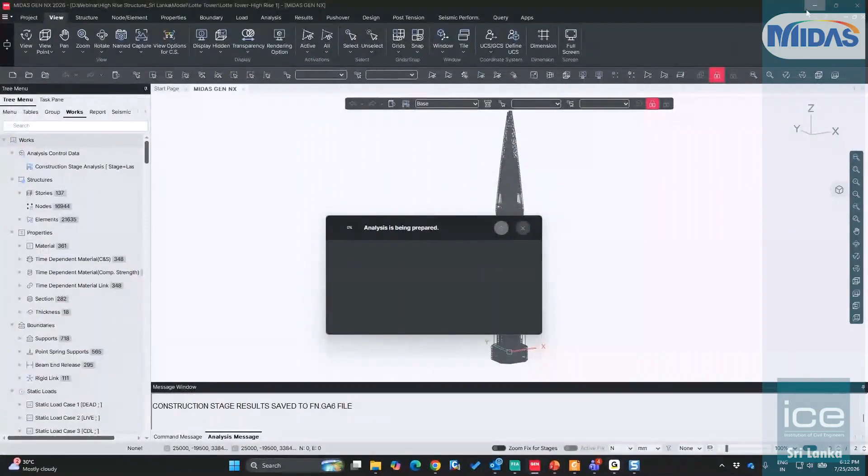Hello, I hope you can hear me, right? Yes, sir, we can. Thank you, thank you for confirming. So, without any further delay, I will first share my screen and then we will start the session. Just give me a minute. I hope you can see my screen, right? Yes, sir, we can see you.

Thank you for the confirmation, and thank you for the introduction. So let's start the session now. The topic is modeling and design of high-rise building structures. I would like to say to the attendees, thank you for joining today's session on this particular topic.

During this session, we will build up a complete picture of how tall buildings are engineered, the loads that govern them, and how a high rise differs structurally from a mid rise, including the main loading systems, the families of lateral load resisting systems, and the specific effects of wind and seismic action. It's not a simple mid rise or regular structure, it's a high rise one, so the governing loads are different.

We also need to consider the construction sequence, as the structure is built from the bottom floor to the top floor, how the behavior, the boundary conditions, and the time-dependent material properties change. These are the things that make the high rise structure different from the low rise or mid rise structure, and also the most crucial part, the differential shortening of the columns.

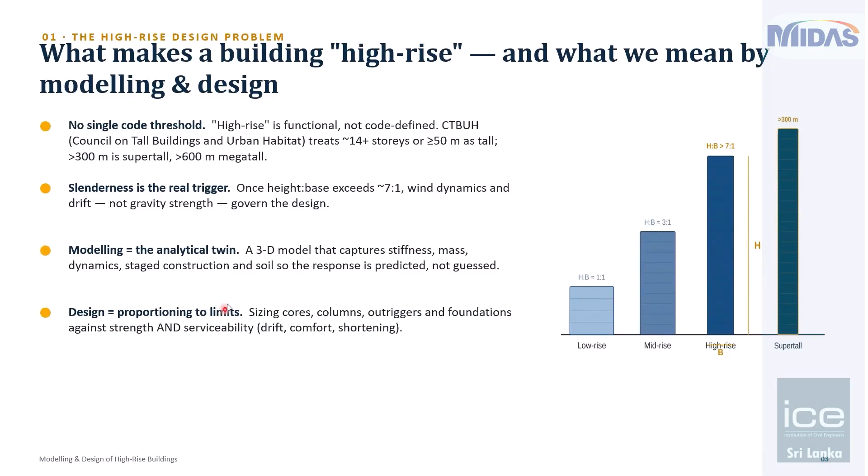So that is the introduction of what makes a building high rise and what we mean by modeling and design. Now, the major loads that govern a tall building.

The gravity load governs majorly in mid-rise or low-rise structures, which includes self-weight, cladding, imposed loads, and is always present and always calculated. But on a slender tower, it is rarely the load that decides the member size. It does matter for one high-rise specific detail: loads accumulated down through the core and mega columns, and then we apply some story reduction factors when we consider live loads over many floors, because it is statistically unlikely that every floor is fully loaded simultaneously. So we have the gravity loads, permanent loads, and imposed loads considered here.

The major one is the wind loading that actually governs. Wind has two components here: along wind and across wind vortex shedding. We will talk about these things in later slides in detail.

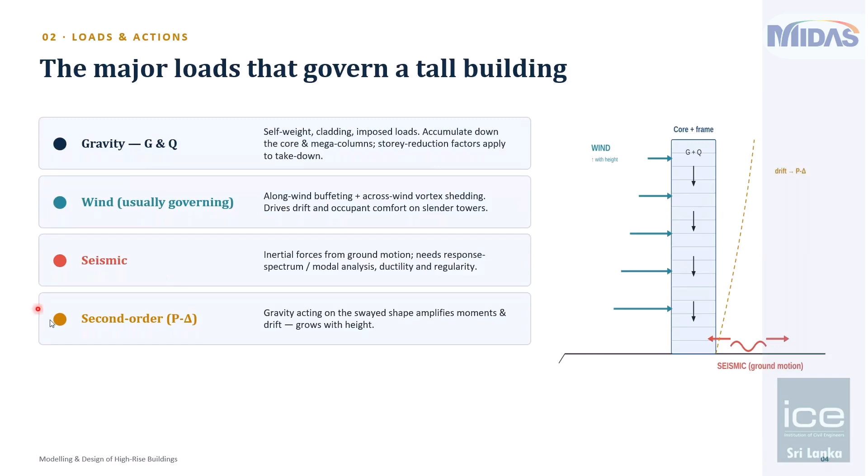The third one is the seismic load, based on the zone where we are constructing our structure, and this also governs the design. Then there's the second order P-delta effect. When we have a very tall structure, there is going to be a lateral deformation, and because of the vertical loading acting through that lateral deformation, there is a secondary effect, a secondary moment or secondary force. That is the second order P-delta effect we have to consider in tall buildings. And finally, the time dependent material effects, which include creep, shrinkage, differential shortening, and construction stages, which we will be talking about in detail in later slides.

Let me talk about what the analytical model must capture, the things we should include when doing the modeling. First and foremost, the full 3D model that includes, if we are going for shear walls and frames and cores - the shear wall in the center of the plan is termed as a core - the modeling of that, outriggers, columns, slabs, all working together in one model and not as a set of isolated 2D frames analyzed separately. So that's a full 3D model we have to generate, with the interaction, so that we can check the interaction between all of these different elements.

Now the rigid diaphragms. As we know, floors distribute lateral load between vertical elements, so we can model that as rigid diaphragms, or based on the openings in the slab, we can model that as flexible or semi-rigid diaphragms. It helps us in distributing the load to the connected columns and connected shear walls or cores. In the previous sessions we already talked about how loads are transferred from the center of mass location to the adjacent column based on the stiffness of the column and so on. So the rigid diaphragm part has to be considered.

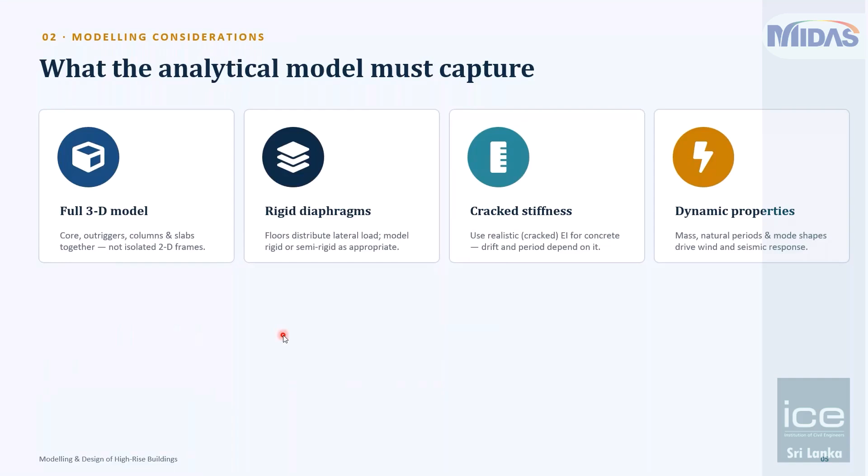The fourth comes as the dynamic properties, that includes mass, natural periods, mode shape. Mode shapes drive both wind and seismic response. If we get the mass wrong, say the seismic mass calculation is wrong, by forgetting superimposed dead load or something like facade weight, every dynamic result downstream is going to be wrong too. So we have to consider these parameters very well.

Now the fifth one is the staged construction. We have to model floor by floor buildup so that the shortening and the lock-in forces are realistic. When we are going from the first floor to the second floor and to the third floor, there are already locked in forces in the first floor because of the second and then because of the third. So we have to consider those locked in forces and the deformations happening to the lower floors because of the upper floors. That can only be considered using staged construction, and it is very much critical in the case of high rise buildings.

The soil structure interaction part - we have already talked about this, which is the interaction between the soil properties that we will be providing as a spring support, and we will be assigning it to the pile location, to the raft location, and then we can check the interaction between the structure and the soil beneath that.

So second order P-delta that we have already talked about, why we need this. That is one effect, and also there is geometric non-linearity. There are actually two P-delta effects: one is the capital P-delta, and the other is the small p-delta. Capital one is the global effect, small one is the localized effect. We should consider both, that is the geometric non-linearity, and then we can check the non-linear behavior of the structure, how it is changing based on the applied loading.

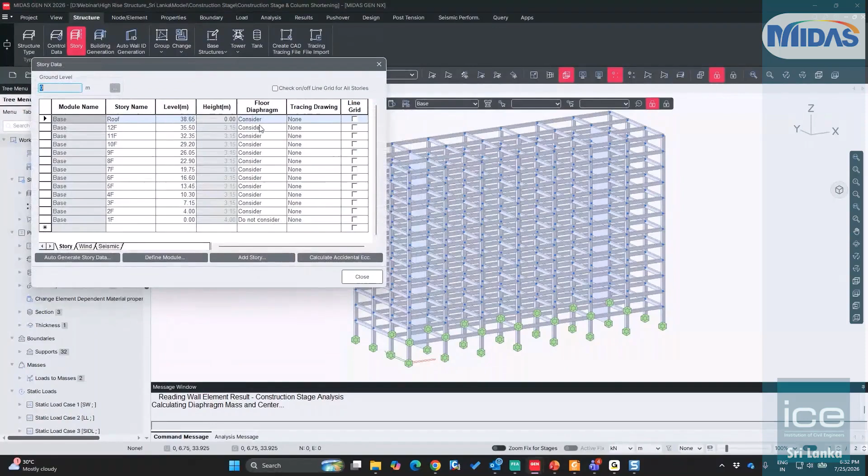So when I go to the display option here, go to boundary and then story diaphragm, and let me undisplay the support. Here it's the center of mass location that is located by the software, and that is connected to each and every node in that particular level to consider the rigid diaphragm behavior.

Here you can see these blue dots at each and every floor level - they are the center of mass location for each story, and they are connected to each and every node at that particular story to consider the rigid diaphragm behavior. Where we don't want to consider it, we can just go to story and click on 'do not consider', and it will not consider the rigid diaphragm behavior in that particular story.

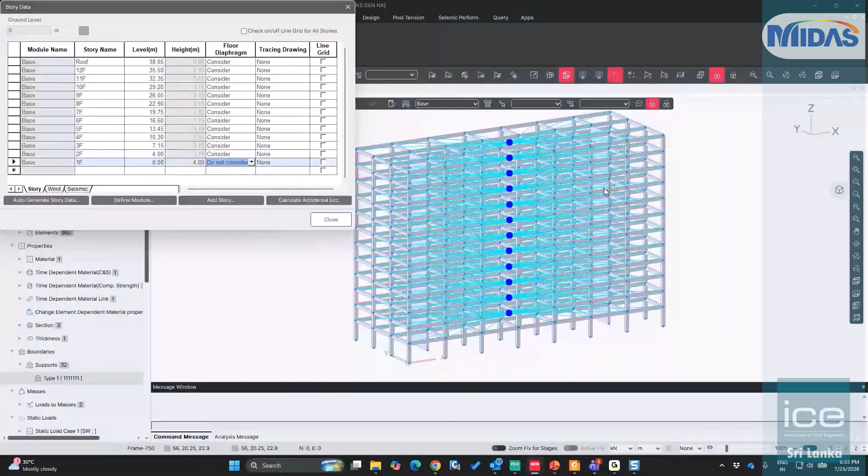And then we can go on modeling the real-time slab there. If we are not considering the rigid diaphragm, we can just go to node element, create element, and from here go to plates, select the material, select the thickness of the plate, and define the boundary nodes like this.

We can click here, define the boundary nodes, and it will generate a slab having a plate element of thick type, which will consider the in-plane and out-of-plane behavior both. If we want to consider only the in-plane, we can go for the thin type, and with drilling degree of freedom, this is to consider the torsional effect on the plate. So there are different options available here.

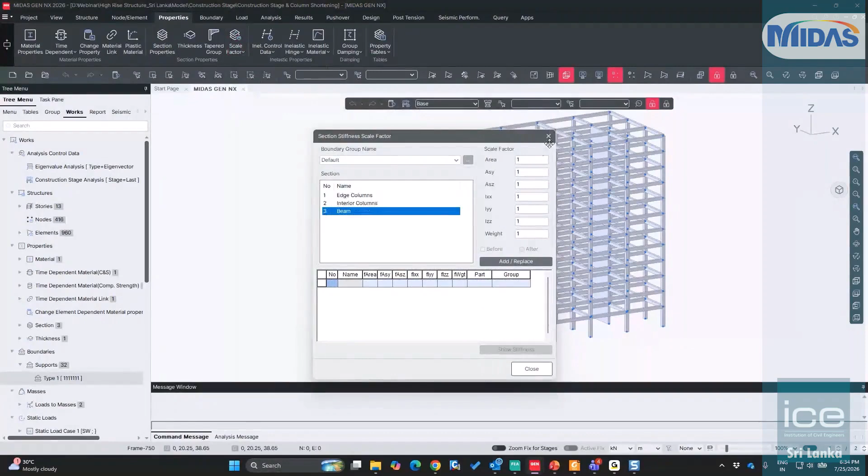Now the cracked stiffness part. That can be considered using the properties tab here, and we can go to scale factor, section stiffness scale factor, and here these are the different section properties that we have defined. Let me show you that. These are sections - this is my edge column, this is my interior column, and this is my beam.

These are my beams. So I can go to the scale factor, and for the beam, if I want to consider 35% of the gross stiffness, I can go to IYY 0.35 and IZZ 0.35 and click on add, and then it will add that particular scale factor to consider the cracked stiffness. Similar to that, we can do the same for the columns.

Now the dynamic properties. When we are running this particular example, it's actually G plus 12. We can go to G plus 20, 30, 40, whatever we want. And when we want to consider the mass, we will go to the structure type and convert self weight into masses. We will check on, and this conversion will be in the X, Y, and Z direction, so the self weight will be converted into X, Y, Z direction.

Now the next option is when we are applying the vertical loads, those vertical loads should also be converted to masses. That can be done in this particular option, loads to masses, and here we can select the load cases. Like here we have self weight, already done in structure type, live load and SIDL - these are two vertical loads. So we can apply the scale factor - 0.5 for live load, and for SIDL it is 1. We use this option to convert loads into masses, which will be used to create the mass matrix, and then to run the eigenvalue analysis to get different mode shapes.

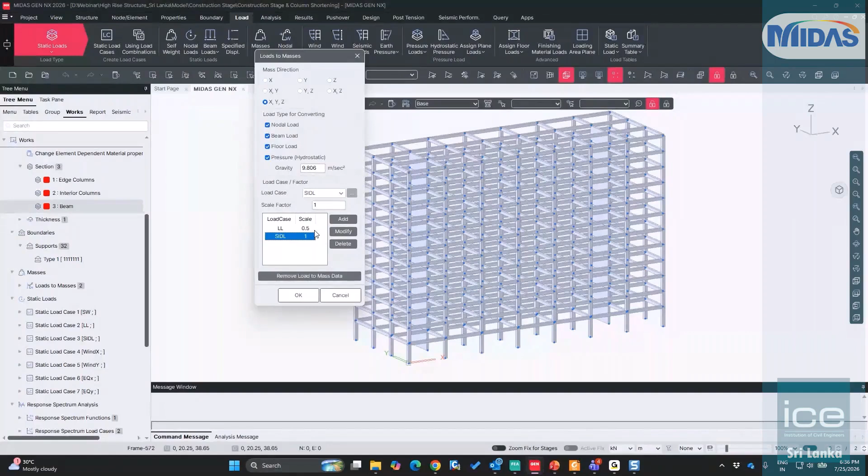And the staged construction, we will be talking about this thing in detail in further slides, so I'm not going into this part right now.

Soil structure interaction - for that I have already shown you, we can go to boundaries and define support, point spring, surface spring option. If we have mat foundation, we can go to surface spring option, and the mat like plate, we will model as a plate element. Then we can go to either distributed spring, or provide the modulus of subgrade reaction as compression only, linear, or tension only.

So it is mostly the compression only type of support which considers the non-linear behavior of the soil, where only when we have compressive force on the soil will we have reaction. Otherwise, if there is any upliftment, it will not show any reaction. We will enter the modulus of subgrade reaction, and it will provide a distributed spring support. So these things can be used to consider the soil structure interaction between the structure and the foundation.

And if we have a pile foundation, in this particular software we have pile spring support. For three kinds of soils - sand, soft clay, and stiff clay - the software practically generates the py curve that we usually get from the geotechnical team. Using the pile spring support, the software generates the py curve, which can directly be used as a vertical spring and a horizontal spring to simulate the behavior of the soil - vertical as a linear one and horizontal as a multilinear, which considers the py curve of the soil.

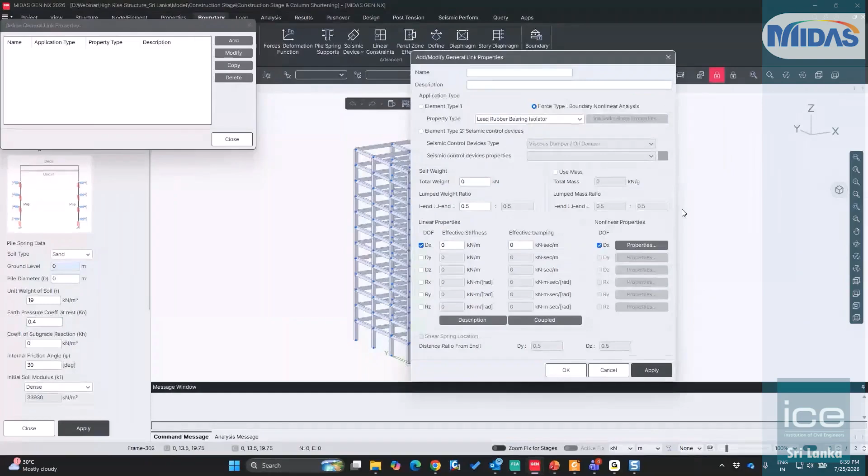The last thing, damping and dampers - I just want to show you how we can provide that. It's also in the general link properties, add, and here we can provide it as a viscoelastic damper, gap, hook, hysteretic, lead rubber bearing isolators, and also non-linear properties to those dampers. Using these options, we can provide that as a spring in our model to consider the damping behavior.

Let's proceed further.

The next thing is how high rise behaves differently from mid rise, so we have tabulated this particular thing here. The governing load in the mid rise is gravity, which is a strength issue, and that typically governs the member sizing. In high rise, wind and drift is actually a stiffness problem, and that typically governs the high rise structure.

Related to behavior, mid rise structures can usually be treated as essentially static, whereas high rise structures are genuinely dynamic - we are dealing with periods, modes, shapes, floor acceleration, and so on. A simple rigid frame is often adequate for mid-rise, whereas high-rise needs cores with outriggers, tubes, or diagrids. We will talk about these different terms in later slides.

And the P-delta effect we have already discussed - it is usually negligible for mid-rise, but very much relevant in case of high-rise, and we have to check it at each and every single design iteration.

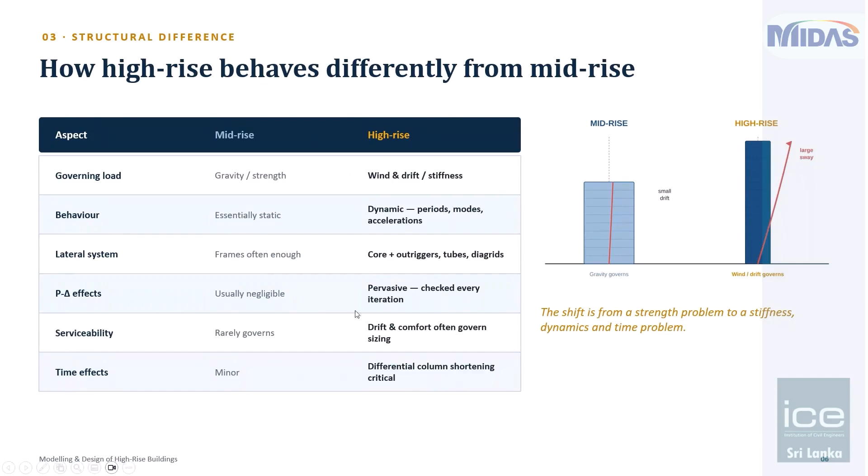What are the different lateral load systems, and what are the differences between them? The first is the rigid frame, practical for up to 30 stories. It's beams and columns moment-connected rigidly, forming a self-contained frame that resists lateral load through bending, not axial wall action. It gives the most open, column-light floor plate of any system, with no shear walls required, but it is relatively flexible, with larger drift under wind or seismic load than wall-based systems, and becomes material inefficient beyond roughly 30 stories.

The second is the shear wall or core type structure. This core can be at the lift location in our building. It carries essentially all the lateral loads, behaving like a vertical cantilever fixed at the foundation. It is very stiff and efficient with simple, predictable behavior, and the core conveniently doubles as the services spine. The effectiveness drops off after this; the system can go up to about 40 stories, not more than that.

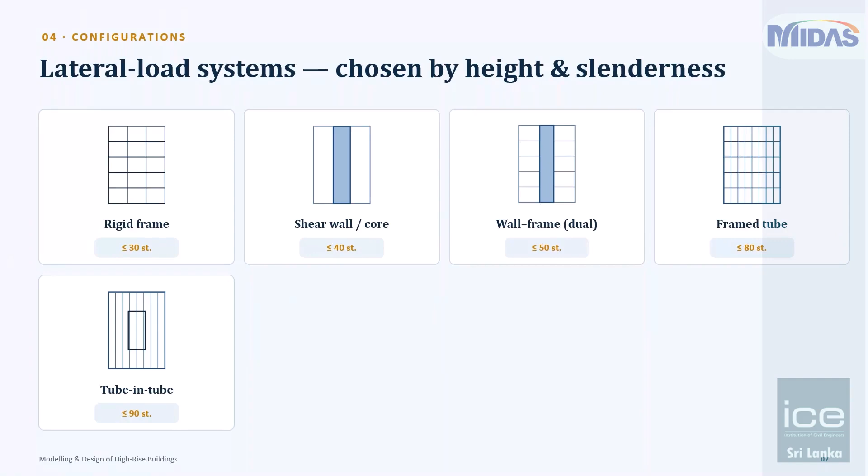The fifth is the tube-in-tube, where there's a tube structure inside of a tube, making it more efficient. The maximum height it can go up to is about 90 stories.

Then comes the outrigger and belt system, where we have a core shear wall in the center and peripheral columns. The columns are extended at the periphery, and we connect the core to the peripheral columns using outriggers, which are deep beams. This increases the effective base size. As we talked about slenderness ratio earlier, a higher aspect ratio makes it more efficient. So when going 100-plus stories, we increase the aspect ratio by providing a shear wall in the center and peripheral columns, connecting them using outriggers.

Another example is the diagrid, where we don't have columns but diagonal members instead. Then there's the bundled tube, which we see in a lot of super tall buildings, where as we go up, the tube system bundles a large number of tubes together to create a super tall building.

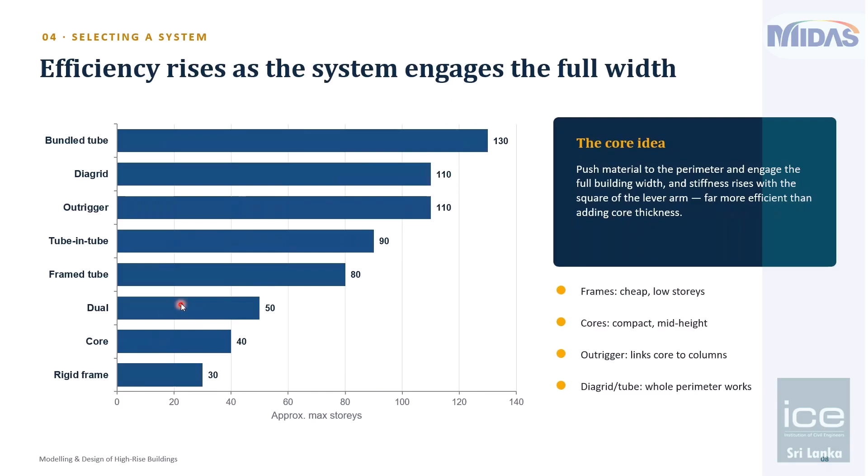So now let's talk about wind loading. What are the different loadings that we have already discussed? Wind load, seismic loads, and other types of loads. Let's start with the wind load, the along-wind and across-wind effects.

Wind is usually the headline load for the slender tower, and it causes a pressure that pushes on the building. The first part is the along-wind response, that is the buffeting caused by turbulence in the wind direction. In Eurocode terms, this is captured through the structural factor CsCd, and we will be looking at how we can calculate that factor, and how the software gives us that particular thing in later slides.

And crosswind, that is actually the vortex shedding, which is a more dangerous phenomenon. As wind flows past a bluff body like a tower, it sheds alternating vortices on each side, which creates a sideways oscillating lift force. When the shedding frequency coincides with one of the building's natural frequencies, resonance occurs. This is precisely why very slender towers often need wind tunnel testing rather than code formula methods alone. So crosswind is more dangerous than the along-wind parameters.

The third one is occupant comfort, which we have been talking about as the serviceability criteria, where we check the peak floor acceleration frequently, and that should not exceed a given criteria. So the peak floor acceleration can be checked as a dynamic loading because of the wind.

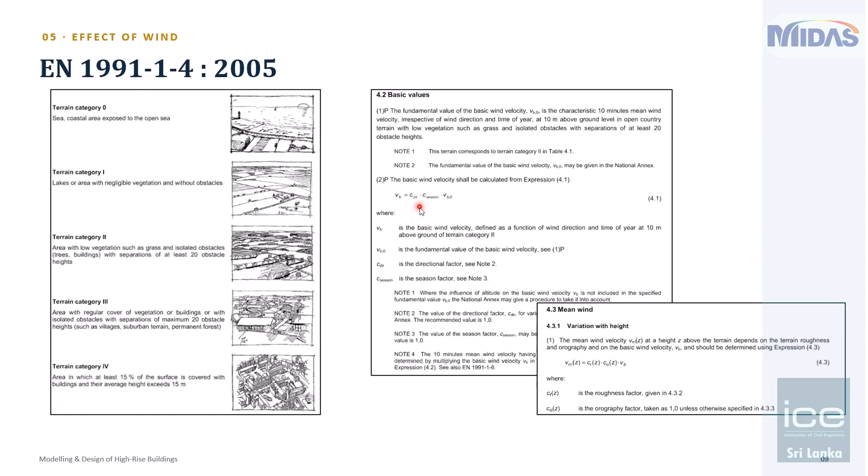There are also factors like orographic effects, adjacent buildings, nearby buildings, what is causing effects on the newly constructed building, and the height of the building, how the wind load changes because of the height of the building, and so on. This needs to be considered based on Eurocode EN 1991-1-4 2005.

And now the wind force calculation, that is the CsCd factor we talked about in the initial slide of this wind loading topic. There are three different force factors: external, internal, and friction forces. The combination of all these forces gives us the final wind force on our structure. So let's see this in the software.

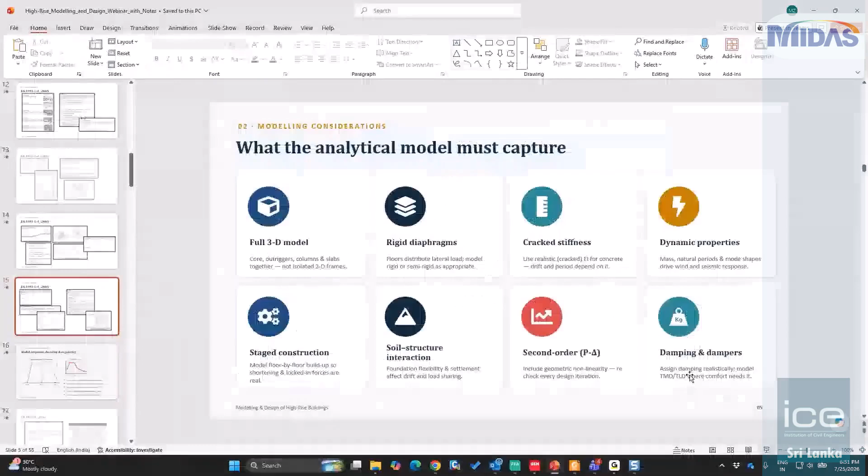In this particular example, when we go to loads and the wind loads, here the structure type and the friction coefficient, like the force effects that we talked about in the last slide, we can use these coefficients. The orography factor C naught, C direction, that we saw in calculating the basic wind speed, we have to enter that here.

Seasonal factor and the turbulence factor, building height, all these things we have to enter those parameters here. Now the orographic effects - to consider them, we can go to this particular option, cliffs or hills, whatever it is, and the building location, whether it is upwind or downwind with respect to that orography.

These are the different parameters like the height of topographic feature, length of upwind and downwind, that we can enter. Now the effects of neighboring high-rise structure - we can consider raising of displacement height. We can consider all these particular different criteria given by the Eurocode, and then apply the final wind loading in our structure, also considering the external and internal pressure coefficient.

The code specifies the formula for external and internal pressure coefficients. Internal pressure coefficient is some factor of the external one, so we can use these particular options - either we can go to automatic, or we can go to user defined to define those particular coefficients here.

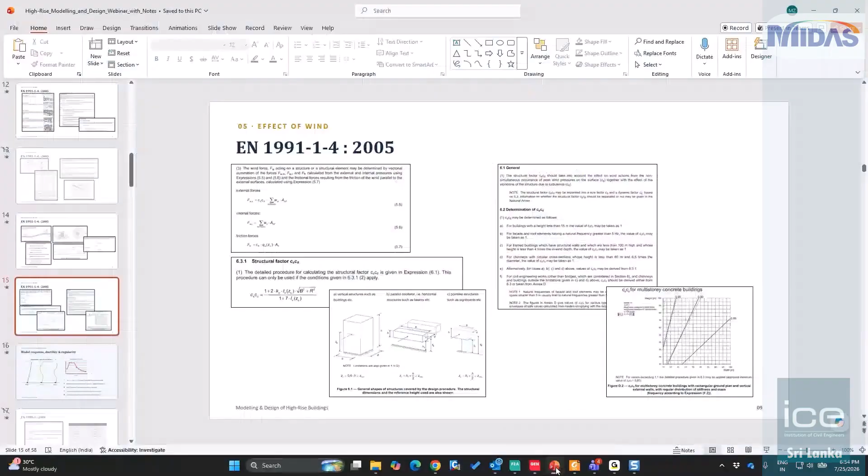For example, if I enter that as my point 1, finally it will calculate that structural factor as 1.89, and I can just click OK, and it will be considered here. So this is how we can consider the CSCD factors to calculate the final force because of the wind loading in the software. These are the formulas given here in the Eurocode to calculate those factors.

Let's come to the next loading thing, that is the response spectrum, or the seismic load, which considers the different mode shapes, time period, and that actually depends on the flexibility of the structure. So seismically, tall buildings behave quite differently from short ones, and this slide sets out why.

Tall means a long fundamental period, which is T1. That means the simplified lateral force method in seismic codes are calibrated for short period, more regular structures, and they usually become invalid or at least unreliable once our period gets long and our mode shapes get complex, which is essentially always true for a genuine high rise.

For example, if we have this particular response spectrum curve and we have a very high period of a building, like when we have a high rise structure, the period increases, and that comes somewhere here. So that means our base shear, the force for which we are going to design the earthquake force, lies somewhat here. That is not the actual force that is going to be there in a high rise structure, but because of the high period, that tells us something like this.

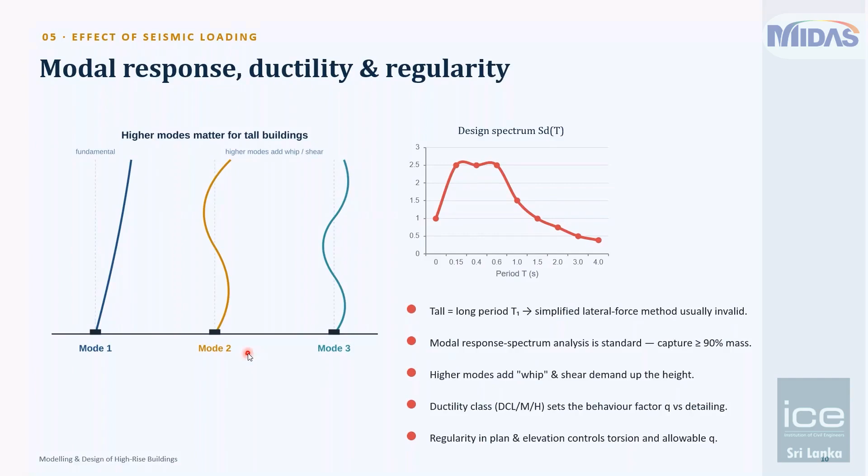Regarding the response spectrum curves, Eurocode gives us two types of response spectrum, type 1 and type 2. In simple terms, type 1 is for higher magnitude earthquakes, and type 2 is for lower magnitude earthquakes. In the software, we can directly go to Eurocode 8, select horizontal or vertical design spectrum, and there we can select type 1 or type 2 accordingly.

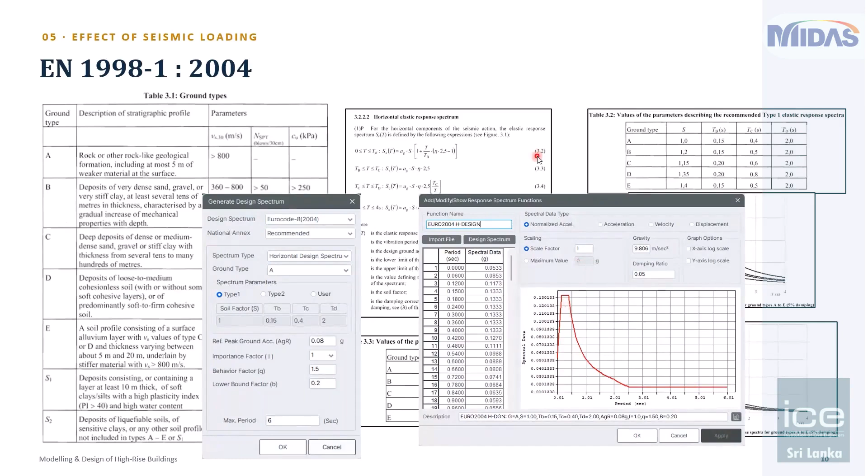We can also set the behavior factor q, based on which the spectral data will be calculated and the response spectrum curve will be generated as given in Eurocode, and then we can use that loading to perform the response spectrum analysis.

So those are the two major loads, wind load and the response spectrum loading, that we have talked about. The third one is the time dependent loading, which is actually very critical in the case of high rise structures.

So what are the different time dependent material properties? First is the concrete strength, the characteristic strength of concrete, which actually increases as time goes on. Then there's creep, which is a sustained stress that is slow and ongoing, and it keeps increasing. It has two effects, one linear and one non-linear, where when we remove the load, some part of the creep is restored and some part is not restored.

And then the third one is shrinkage, which happens because of the loss of moisture in the concrete.

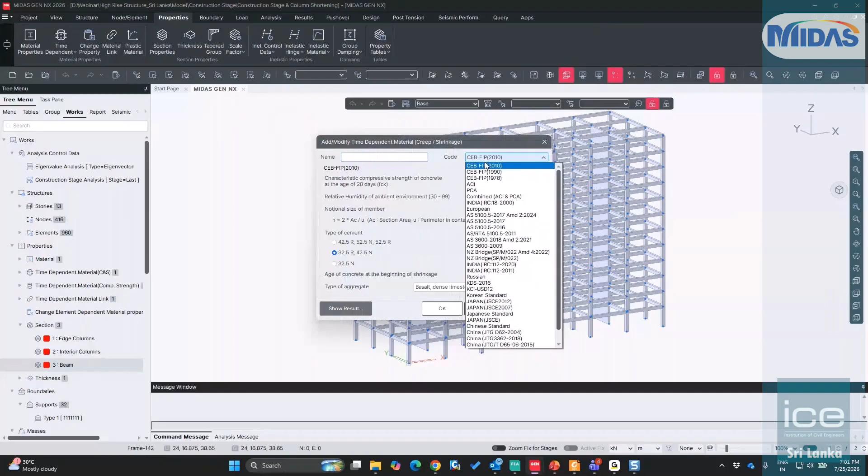There are different parameters. We go to the European code, and we have to specify the characteristic compressive cylindrical strength of concrete at the age of 28 days. Suppose I go for 50,000 kilonewton per meter square, relative humidity 70%, and the notional size of the member, which is the H value, that is 2 times the section area upon perimeter in contact with atmosphere.

So we will first write a random value to start the calculation. Then the software calculates the notional size of each and every member on its own. It's not possible to calculate everything and write it manually, so the software does it for us.

So we will go for the EN 1992 type of code. Age of concrete at the beginning of shrinkage is 3. Then we click on show result, so we get the creep coefficient, which we have already seen in the slides, and this is the shrinkage strain.

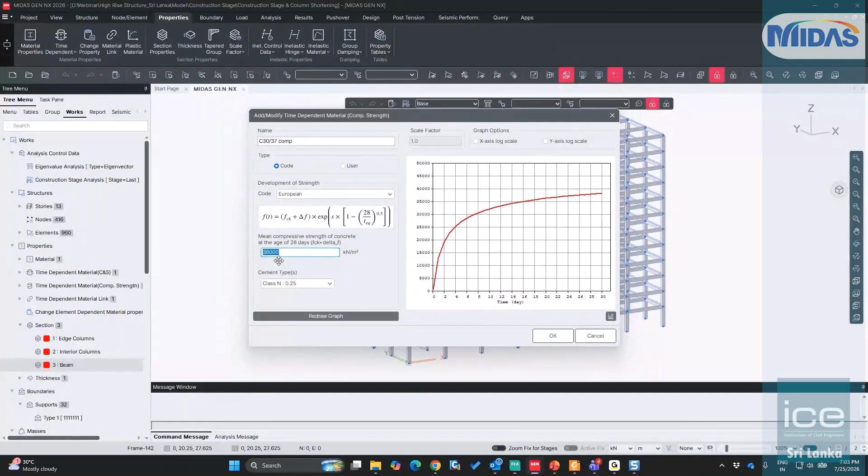So these are the values for creep coefficients. When we want to define the compressive strength, we go to compressive strength, modify. Here we select the code Eurocode, and again the mean compressive strength of concrete at the age of 28 days, and also we have to consider the delta F, which is 8 MPa based on Eurocode. So when we are considering 30 MPa, it will go to 38 MPa while defining the parameters for the compressive strength and the type of cement.

Then we link these material properties with the defined grade. We have already defined this particular grade C30/37, and in that we are linking the creep shrinkage and compressive strength material properties as time dependent material properties. Also the notional size can be defined by going to change properties, and the parameters given based on Eurocode and CEB-FIP are the same, so we can use CEB-FIP directly. If I click on this three dot button, here you can see the H value for each element is calculated by the software, so we don't need to worry about that part.

The second part is the response spectrum loading. That can be applied by going to load and the dynamic loads. There we have response spectrum as well as time history loading. We are not going to time history load right now, so response spectrum function.

Modify design spectrum, and here we can select the respective code. Then there are four options: horizontal elastic, vertical elastic, horizontal design, and vertical design spectrum. I'm going to horizontal design spectrum. Ground type - these are the different ground types given in Eurocode, and then type 1, type 2 that I told you earlier, these are different types we have to select. Then the peak ground acceleration, importance factor, behavior factor Q, and the lower bound factor B maximum up to which we want to see the results. Based on that, we can define the response spectrum curve.

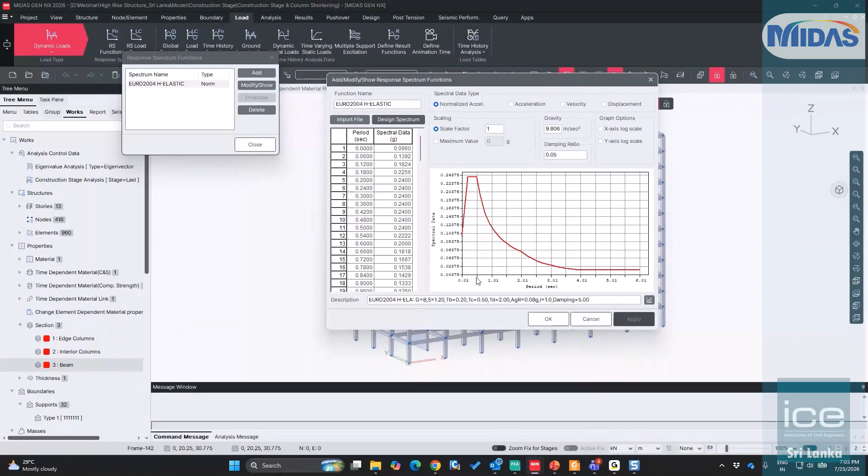Now, when we have defined the response spectrum function, we go to the load cases. Here in this particular load case, we select which plane we are applying the response spectrum loading, which is the XY plane, and excitation angle is 0. When we have a symmetric building like this, we can directly enter that as 0. Then the modal combination control, which is based on CQC or SRSS or absolute or linear combination, whichever way we want to combine the modes, we can assign that.

Now we have one more option here, termed auto search angle. When we don't have a plan like this orthogonal plan, but some unrealistic, non-symmetric kind of plan, then we don't know what is our principal axis or principal angle. So in that case, we can't directly apply the loading at 0 degree. We have this option - auto search principal angle, major. Then we apply the loading by considering the major in X, and in Y we apply the loading by going to the ortho. What the software does is apply the loading along this periphery at each 1 degree interval, and whichever angle gives us the maximum result is stored here as RSX, and RSY automatically takes the 90 degree of that angle, the orthogonal axis. First it finds the principal axis causing the worst effect on the structure, and then applies another loading at 90 degree of that principal axis. So we have these options to apply the response spectrum loading.

Now let's talk about the construction sequence, construction stage. We all know that buildings are not constructed in one single day, and especially if it is a high-rise structure, it is going to take a lot of time, like 2 years or sometimes 3 years. So when we have the time difference between construction of elements, like the bottom floor and the top floor, the creep, shrinkage, and compressive strengths are also going to be different for those parts - the bottom and the top part. So we cannot simply model it as a single model like this.

We cannot simply model all the floors at once, apply the dead load, live load, wind load, earthquake load, run the analysis, and then design each element based on those results. We cannot do that, because in that case we are ignoring the effect of time dependent material properties, which is very crucial when the construction time is high, and also the construction sequence, like when the boundary conditions are changing.

So we have to consider all those parts, especially for a high rise structure. What we need to do is model it step by step: the first floor, then the second floor, and so on up to the last floor, whatever floor numbers we have. Then we apply the final loads, like live load, wind load, earthquake load, and check the results of each construction sequence.

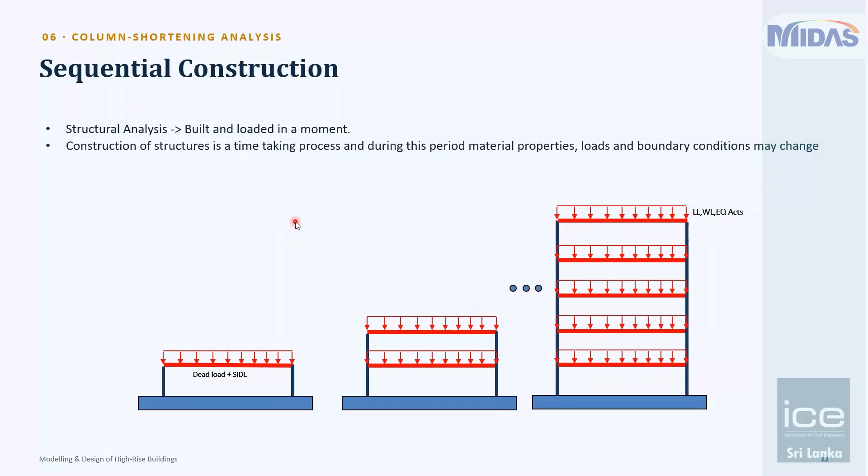When we go for the final model and check the bottom story results using construction stage analysis versus a model not using construction stage, the demands are going to be different. The sagging moment, the hogging moment, and the shear forces will be very different in both sequences, because in one we are considering time dependent material properties, and in the other we are not. Also, the boundary conditions matter - sometimes we provide temporary supports that change the behavior of the beam from cantilever to simply supported or propped cantilever, and eventually to a fixed beam. During construction, the boundary conditions also change, so we have to consider that. That is why we need sequential construction or construction stage analysis.

For example, in our conventional analysis, we model the whole structure at once, apply the loadings, and sum up the results. So we have this particular structure - this is my model where I have modeled everything at once. My first story is loaded, my second story is loaded, and then we do a simple linear superposition of these two scenarios to get the final model. This is what we do in conventional analysis.

In construction stage analysis, we only model one single floor - that is actually the practical scenario happening at the site. Then we model the second floor after that, and then we specify the loads.

In the conventional case, all the sets are active in our model, and we apply the loads one by one to each floor. But if you see this particular beam, it is being shared by these two columns. So the stiffness of the columns and of the whole structure is different from the first stage to the second stage. In conventional analysis, it remains the same for both situations, but in construction stage analysis, it changes. We have only these two columns and one single beam at first, and then we have the whole structure. That is very crucial for the final result, and because of this the final result changes a lot.

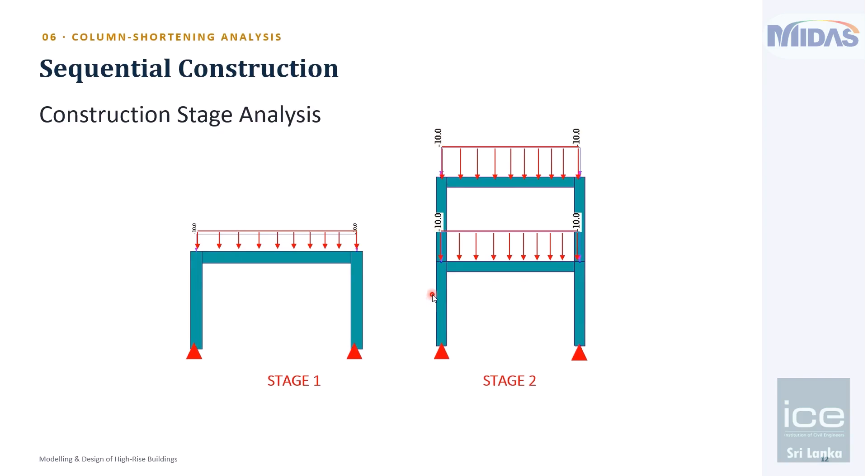For example, when we go for the conventional analysis, the bending moment in the column is 16.6 and the sagging moment in the beam is 29.2. But using construction stage analysis, that changes to 35.3 and 32.3. So with conventional analysis we end up designing for these lower magnitudes. Ideally we should not do that, because after the whole construction sequence we are going to get higher forces than this, so we need to consider those additional forces.

Now let me show you what is available for this in the software. This is when I turn off the 3D view - this is the building having shear walls and frames.

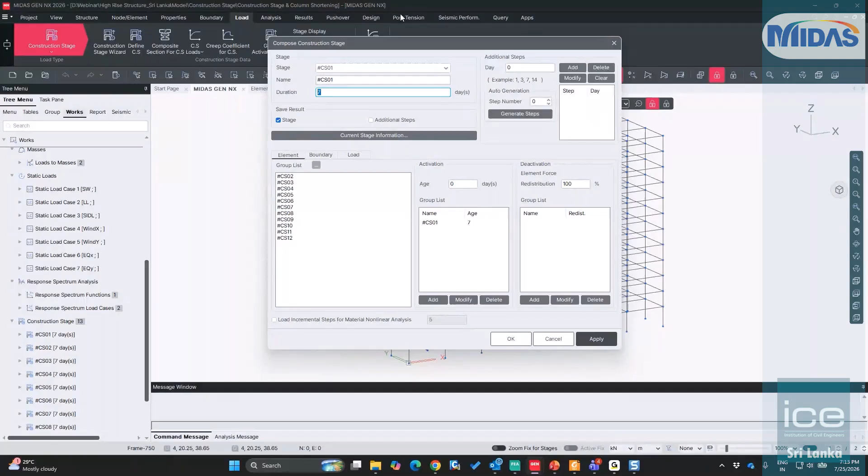When I go to construction stage, define CS, and add and modify, here we have three options: element, boundary, and load. And the duration - duration means what is the time this particular construction stage takes to finish. So suppose I am constructing the first floor right now - how long will it take to finish the first floor construction? That duration we have to enter here.

And then what are the elements that already exist when we are constructing this particular thing? So we already have, suppose, the foundation, then we are going for the first floor. So we will activate the foundation, which will have some maturity.

Suppose we want to consider 7 days of the maturity, or 28 days for that particular already activated element. So we can activate that here. And then the boundary conditions.

When we are constructing the first floor, our foundation is already there, and that is having some spring support or some fixed support or different type of supports can be there. So we can specify those boundary conditions here in this particular construction sequence, and what are the different loads in this construction sequence, CS01. So we define these three parameters, and then when we go to CS02, those CS01 element effects are being carried forward to CS02.

Then we are going for the third floor construction. So again, if we activate the elements of the first floor that has already been constructed, then we go to the boundary conditions if there are any change, and if there are any additional loads applied, we apply those here. If we are deactivating some loads or some boundary conditions - we already have applied some boundary conditions, and in further stages we are removing some trestles, some temporary supports - then we can go to the deactivate option and deactivate those boundaries and the loads as well.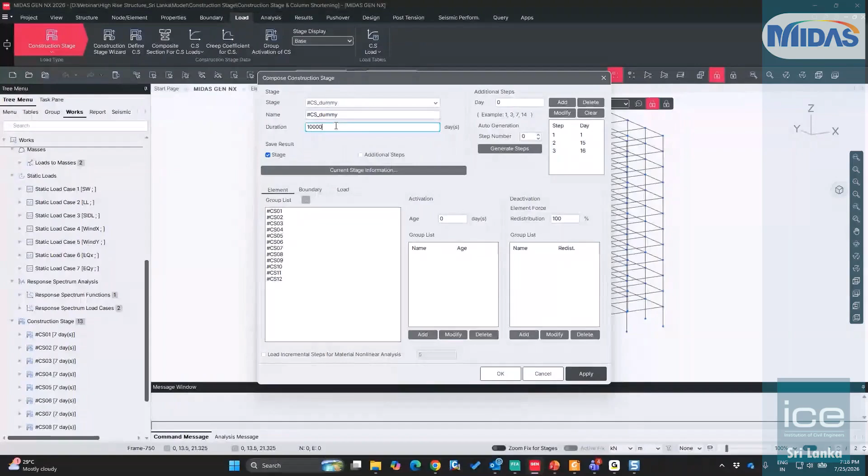And this is the broad way of defining construction stage. We also have one wizard option.

To quickly generate the construction sequence, when we do not have a lot of changes in the loading and so on, we can use this particular construction stage wizard, where we specify the number of different stories and all. Then we can just go for automatic generation, and we can specify what are the load cases, how the story is going to be incremented one by one or two stories at the same time, how much time this story is taking to construct, and what is the member age - the members that are already activated in that particular story, what is the maturity of that.

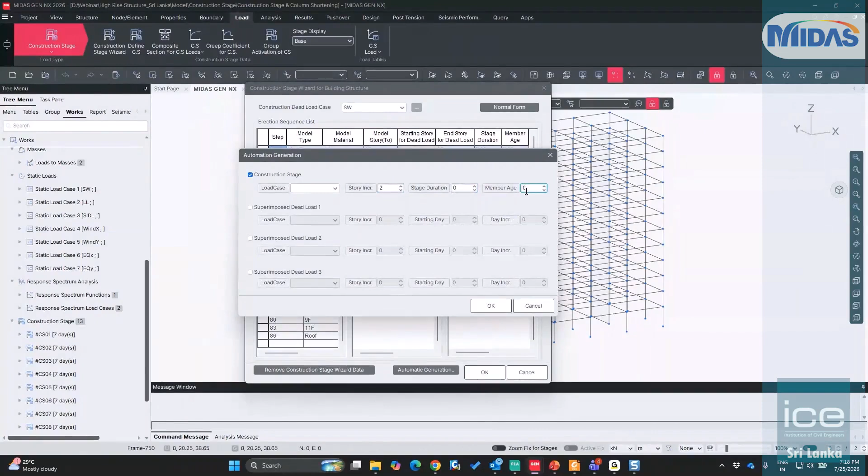So we can use this shortcut method, and it generates the construction stage quickly. Let me show you one by one: this is CS1, my first floor, and now this is CS2, second, third. So progressively this particular structure is being constructed.

And when we check the result without construction stage and with construction stage, that actually changes a lot. Let me show you, I have one example to show.

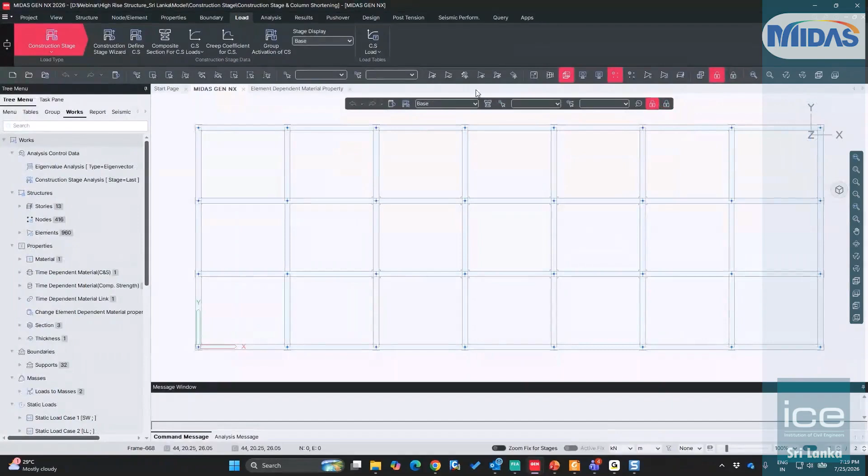So I go to the post processing mode, and I go to the last construction stage, and I will go to results, forces, beam diagrams, and then summation that will include the effect of creep and shrinkage and dead loads and other live loads and SIDL if those are there. Legend apply.

Okay, so these are my maximum moments, that is 157 and minus 318, sagging and hogging. And I have another model that I just took out from that same model, and I deleted the construction stage.

And here we don't have the effects of creep and shrinkage because we haven't defined any time dependent material properties. So when you check because of the self weight only, it is 37 and 68. Although there are live loads and SIDL, we can neglect those effects.

Still, that's very high in the case of construction stage. The results are very, very high. So we have to consider the effect of construction stage.

So let's go to the slide. Moving forward, we have understood what are the time dependent material properties, what are the construction stage sequences. Now we will be talking about what is this column shortening and why does this happen.

This particular column shortening is nothing but the differential settlement of the vertical elements like the core walls, the columns, those are there. That happens because of creep, shrinkage, elastic deformation. So there are basically inelastic deformation or elastic deformation.

Elastic deformation is something that immediately happens and then it is restored. But the inelastic one, that is because of the creep and shrinkage, is not restored, and there is a permanent deformation that we have to account for.

So when we go for like 30 stories, 40 stories, or more than 50 meters building, the loads on the vertical elements keep on increasing, and the creep and shrinkage effects keep on increasing, and we have to consider those effects because that causes - let me go to the further slide.

Here you can see that when we have a central column and then we have the edge column, this particular column here is having this much tributary area of the slab, and the loading is being applied to this column as single P value. And this edge column here is having two slab areas and the loading is 2P, and this central column is having the loading of 4P.

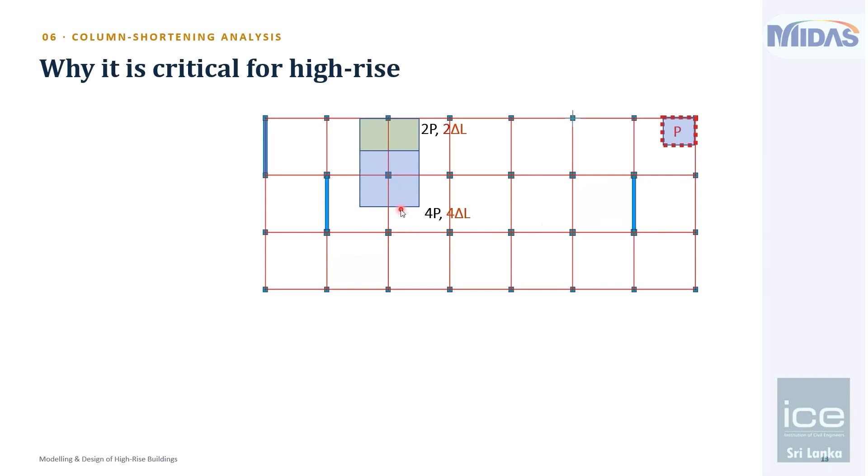Since the loading changes, if now we are talking about the same cross section columns, that also depends on the stiffness and all. So right now when the loading changes, the deformation you can see here - when we apply a P value, there is a deformation delta L, which is nothing but PL upon AE. So the central column will have much more deformation than the peripheral column.

So when the story height increases, this value becomes so significant that the deformation is so significant that the slab which is connecting all these columns and beams tilts and bends at that particular location where we have more deformation, and that is where the serviceability criteria governs. So we have to consider why this column shortening thing is happening and what we can do to mitigate it, which we are going to talk about in further slides.

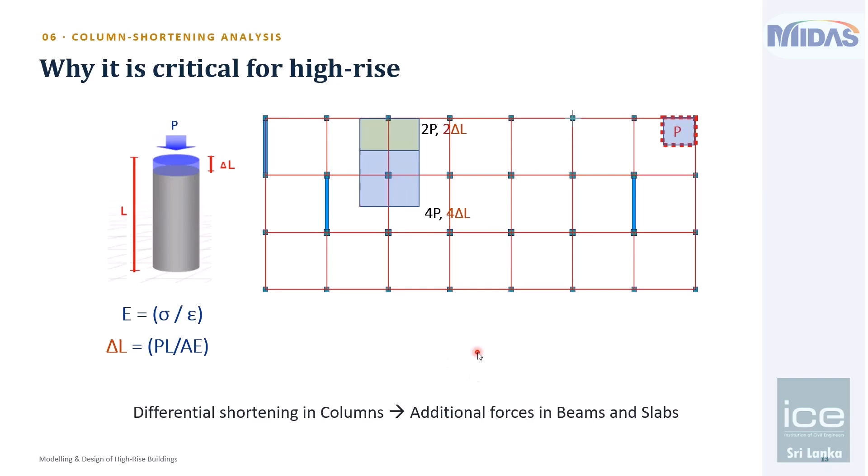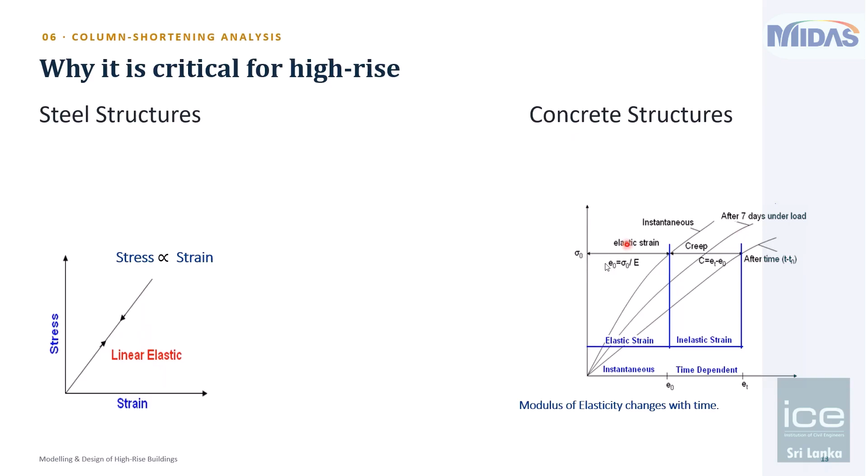And that causes additional forces in beams and slabs. For steel structures, it mostly remains on the linear side, so the shrinkage part is not there, nor the creep part is there. Steel structures have elastic deformation much more than inelastic deformation. But in concrete structures, the inelastic deformation is more than the elastic deformation.

So for the elastic shortening, after removal of the load, that is restored, so that is nothing to worry about. But for the inelastic one, because of the creep and shrinkage, we have more deformation, and then the column deforms permanently, and we have to consider that permanent deformation and why it is happening.

At the time of casting a particular column, we have to assign this deformed value, which is nothing but the summation of elastic, creep, and shrinkage deformation.

So what actually happens is it accumulates over height. Even a small amount per floor, a few millimeters, multiplied by 50 to 100 floors, adds up to tens of millimeters of differential movement by the top of the building. A magnitude that would be structurally irrelevant on a 5-story building becomes a serious serviceability and even safety issue on a 60-story tower.

So core versus column: the core typically has a large cross-sectional area carrying relatively low average stress, while peripheral columns often carry high stress on a smaller section. Because shortening is fundamentally stress dependent for the elastic and creep components, these two element types shorten by different amounts.

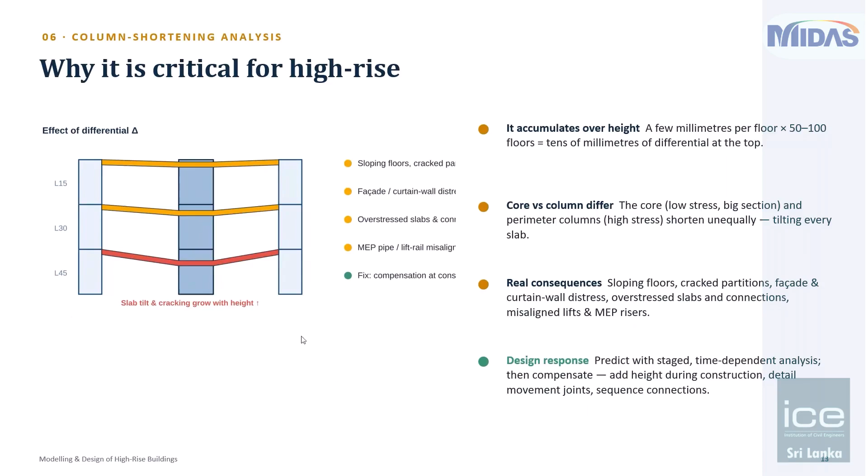These are the different scenarios that occur when we do not consider the differential shortening between the columns. Let's see the other effects that I just mentioned.

The slabs may not be truly horizontal after some time. Beams could be subjected to higher bending moments. The load transfer path gets disrupted, and there are non-structural effects where cracks in the partition walls happen, inclination in the pipelines, and deformation of vertical systems. These are the different scenarios that occur if we do not consider the column shortening analysis.

So what are the compensations? What should we do when this column shortening is happening?

Depending on the construction material, if we use a reinforced concrete structure, the pre-slab installation shortening does not really have much importance, because when there is a deformation in the column, vertically, we can set our formwork at the time of casting the slab at a height such that after deformation, it comes to the leveled value, so the slab does not dip. So the pre-slab installation thing is not of much importance in case of RC; we can compensate it by leveling the forms.

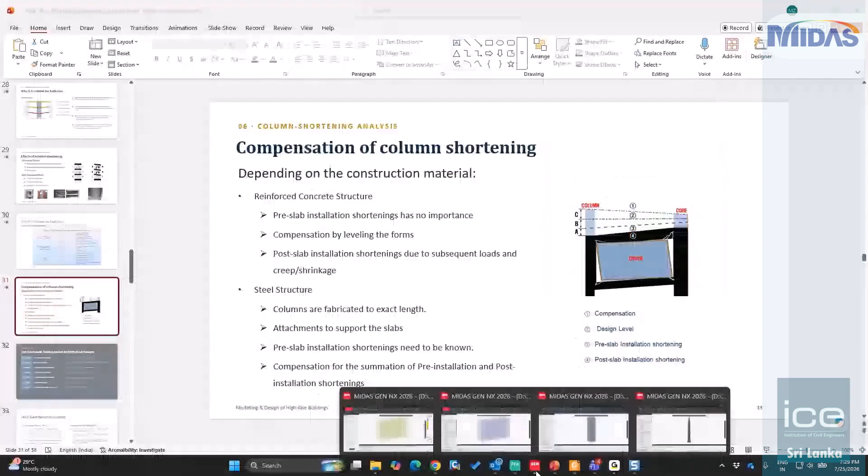So going back to the model, when we have run the analysis, there is an option called column shortening graph for construction stage. In this option, we can just go and select a particular column like this.

So here, when we go to add new, we can provide some name and the coordinates, and then there are different options: elastic plus up to casting, elastic plus sub to casting, and elastic total.

Elastic plus up to casting means it will consider the elastic deformation up to the casting level. So suppose we are working for the third floor, whatever elastic deformation occurs up to the third floor is considered when we choose this option. When we go on constructing the fourth, fifth, sixth floor, the effect of those floors above the considered floor will be considered because of that elastic deformation. Total means it is the summation of up to and sub to casting.

So this is elastic deformation, then creep, then shrinkage, and then total. We are basically considering these three parameters to consider the column shortening effect.

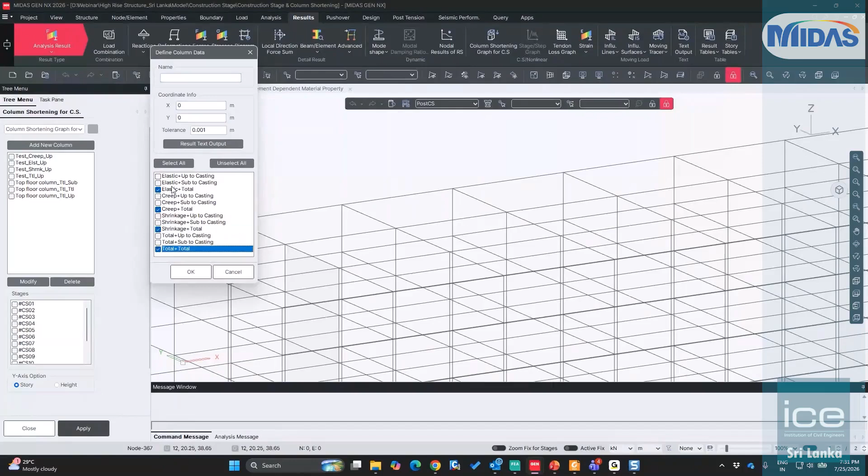Here, at which construction stage I want to check my particular thing - if I go to the very last construction stage, and then apply these functions that have already been created, story or height, apply. So it generates a curve like this.

Here you can see this blue line is for creep, this orange line is the elastic deformation, and the green line is the shrinkage one, and the total one is the summation of all three. So at each height, these are the different story levels and how it is changing for the last construction stage - what is the maximum deformation for this particular column at the very top?

So this is something less than 7mm. This is what's happening at the very last construction stage. So we do get this graphical result because of the creep, elastic, and shrinkage, and we need this final value for this.

So this value is given to the contractor or to the construction worker at site, and then they set the formwork such that after providing the formwork at this particular height, it will have that much deformation, and then the whole level will be at one single plane - there will not be differential dip, and the slab will not deform differentially.

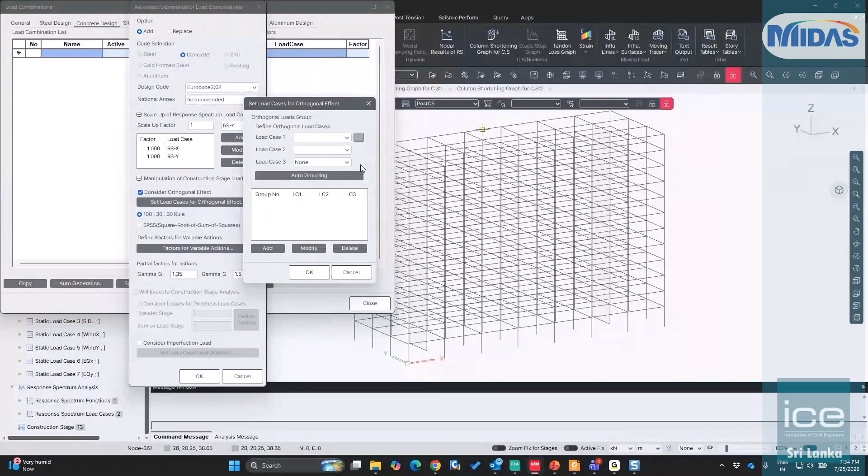And the Eurocode - let me read it. RSX, RSY, and also the orthogonal effect because of that auto grouping. So when 100% of the earthquake loading is applied in the X direction, then 30% will be applied in the other direction. So that 100:30:30 rule is being applied here.

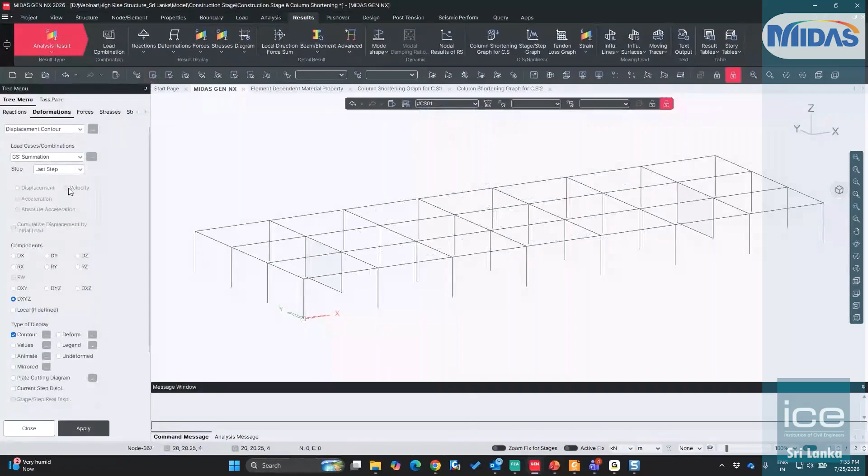So these are the load combinations generated, strength and serviceability based on Eurocode. We can just go and perform - we can check for the deformations, forces, stresses.

Let's go and check the value for how the dead load value is changing, because the moment value is changing at each and every construction stage. This is 28 minus 44. Then we are going to CS2, 29, 43 - then again slightly changes. So because of the dead load, you can see in the legend tab it is slightly changing the maximum and minimum value as we keep on adding the floors.

Here in the construction stage, we don't check for each individual result - we check for the summation that includes the time dependent material properties effect. So, CS1, 02. So this is how we can check for the results in every construction stage.

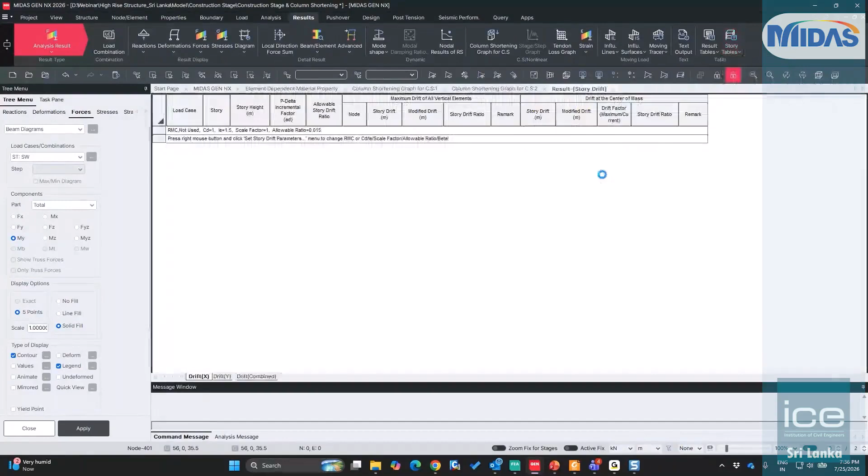We can also go to the story table and check for the drift, which is very much essential for high rise structures. For the code we can check the country code. Right now we will go for NTC 2018, which uses the same parameters based on Eurocode, and we can go for story drift value for wind, earthquake, equivalent static, and response spectrum. For the vertical combination of self weight and live load, I'm going to use a factor of 0.25. This is to consider whether P-delta will be considered or not.

So what is the maximum story drift, and what's the maximum drift of all vertical elements? This is the modified story drift, and this is the story drift happening at the center of mass location, calculated based on the rigid diaphragm that we have provided. Drift in X, drift in Y, and then combined drift. We can then go and check for the story shear force ratio.

Let us go for the Y component of the force, and we will go to the bottom. Here you can see that the top floor frame is governing, having 3200 kilonewtons of force, and the wall is having this much force here. So the maximum is because of the frame for the top floors and the walls. As we go down to the bottom, here again the distribution between the frame element and wall elements can be checked.

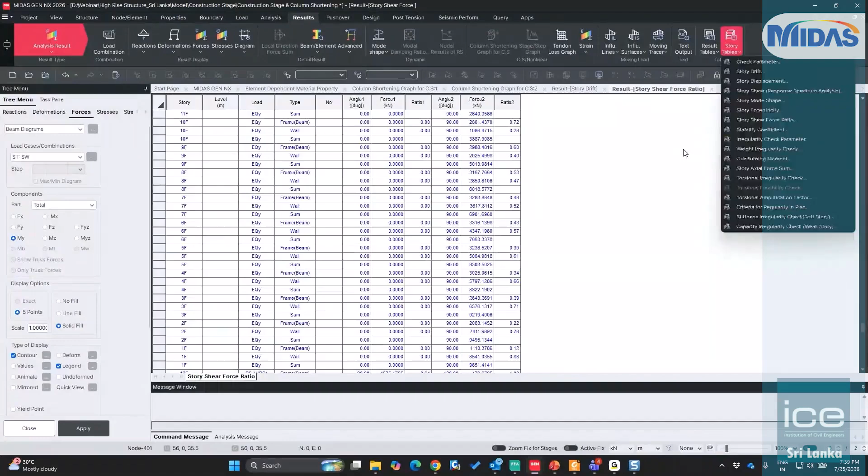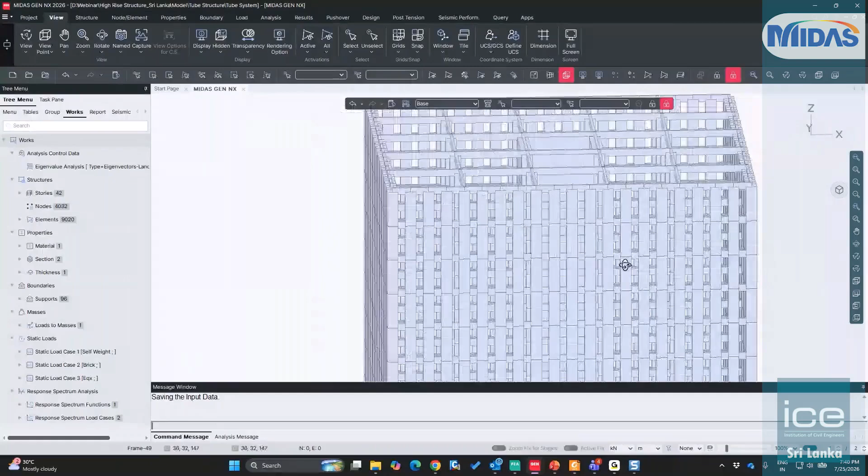I will show you one example of the outrigger and the bundled tube system, the tube structure. I have one example for that. If I turn on the 3D view, this is my core, the shear wall, and these are my closely spaced columns. As you can see, these are arranged so that it looks like a tube, with very little area for windows and so on. That's what the tube structure is for.

Here again we have performed the eigenvalue analysis, and for the supports we have provided fixed support. The loadings have been applied in a similar fashion to what I showed you earlier. The total height of this particular building, going from this point to this point, is 163 meters tall.

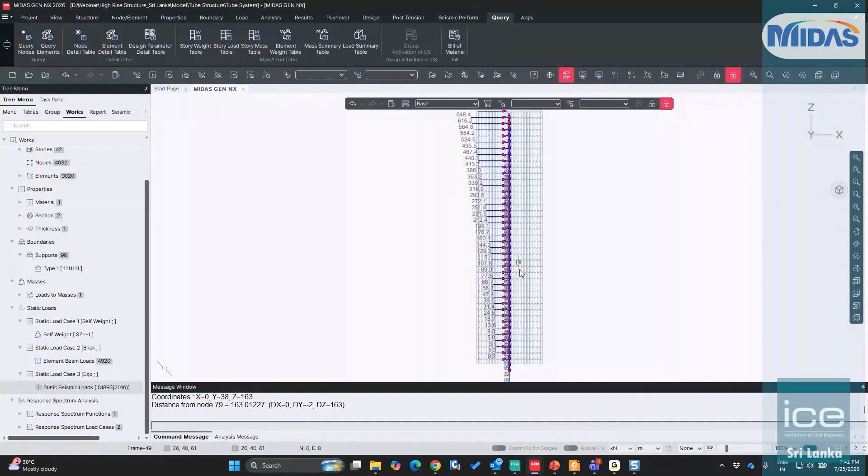This is the equivalent static load that has been applied as the seismic loading, which is actually not the correct approach for tall buildings, but just for the sake of example I am showing it to you. We should ideally go for response spectrum analysis instead. We can check for the mode shape results, going to the vibration mode shape, where we have considered a total of 50 mode shapes. Legend, contour, apply.

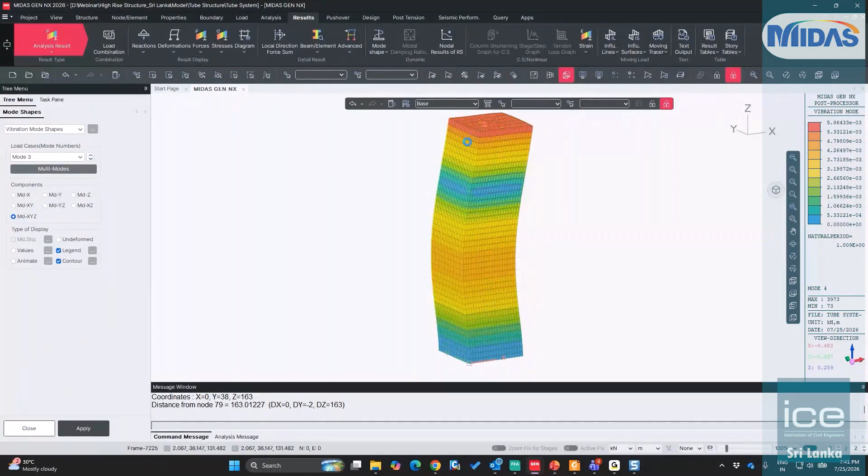So that is our first mode. Then we go to the second mode, third mode, fourth mode, which is the twisting mode. The third mode is the twisting mode where we have rotation. When I go to the top view, this is our third mode.

Here you can see the time period for each and every mode. We can go to this table that lists the frequency, the period for each mode, and the mass participation ratio for each mode. The first mode is governed in the Y direction, with 70% mass participation ratio. The second mode is in the X direction, with similar value. The third mode is about the rotation Z, having 80% mass participation ratio.

So these are the different mode shapes that we can check for tall buildings, and again the story results that I've already shown are being checked, including the ratio governed by the frame versus the core. I have one more example to show you. Let me cancel this one and open that particular example, to show you the outrigger system for tall buildings - how they are modeled, and how the construction stages have been defined for different structural systems.

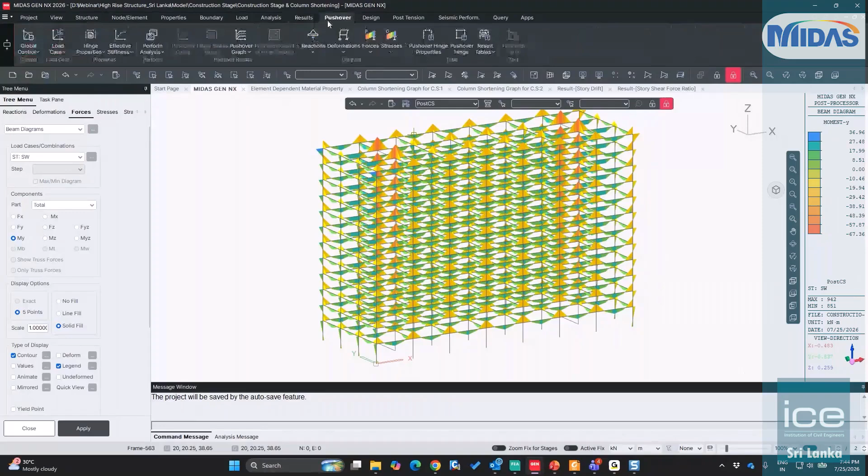So in the pushover tab, we can go to the load cases, global control first, where we set whether we want to consider the effects of the permanent loads before performing the pushover analysis that we want to define here. I will just set one value and then add the pushover load case.

So we can specify pushover load cases in different ways: static load case, uniform acceleration, mode shape, normalized mode shape. These are the different four ways of applying those pushover loads.

So we can divide that loading into a number of steps, either 20, 50 or 100, and we will consider the P-delta effect along with that. And if we want to consider the effect of the earlier applied permanent loads before performing the pushover analysis, we can consider those effects as well using these particular options.

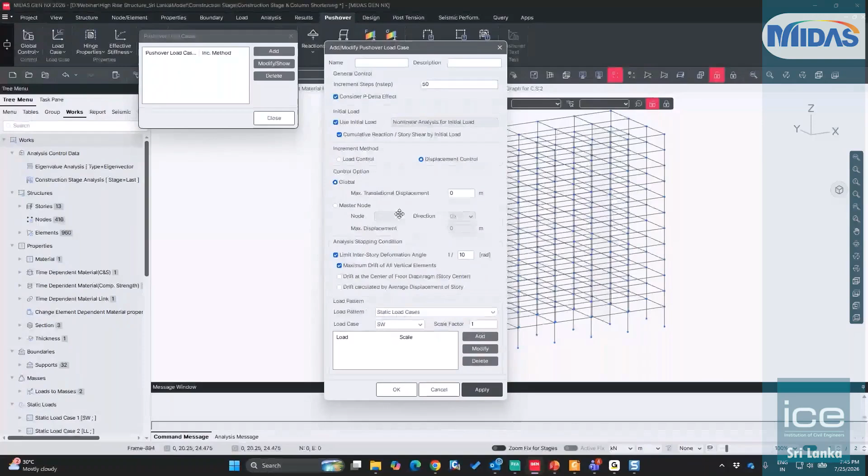And these are the different incremental methods. So we generally go for displacement control, where we specify the master node. Suppose this is my top node, and I'm giving 100 mm of deformation for this particular node in the X direction, and add.

So the load will be applied based on this particular loading, whatever we have defined here in EQX, and that will be divided into 50 number of steps until we get this 100 mm deformation. And then the base shear versus displacement curve will be generated. The pushover curve will be generated.

It also asks for the hinge properties. We can go to the hinge properties here and specify the moment rotation, moment curvature, distributed or lumped, and whether bilinear or trilinear type of curves if you want to consider.

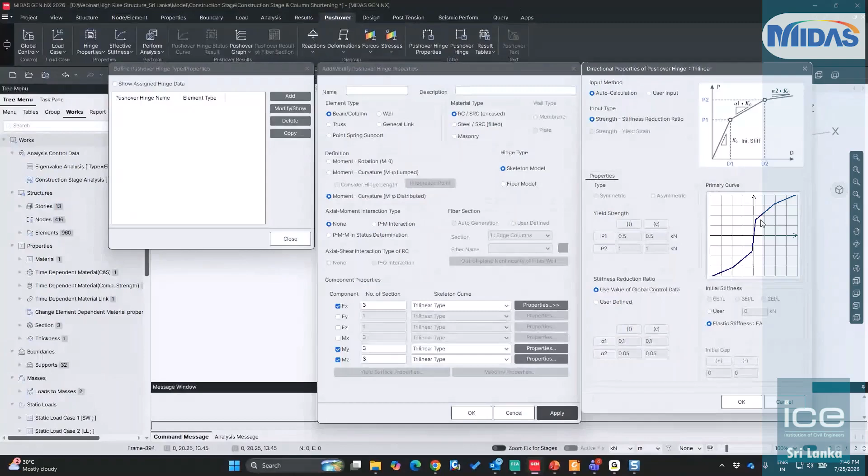And also if we want to go for the skeleton or fiber model, we can define the fiber hinge properties as well as the skeleton model and perform the pushover analysis for that particular hinge. Here we can go and define the backbone curve based on this particular given diagram.

So these are the non-linear options that can also be used along with the tall building. Now let me see, yeah, that is here. So it's an example of that outrigger system.

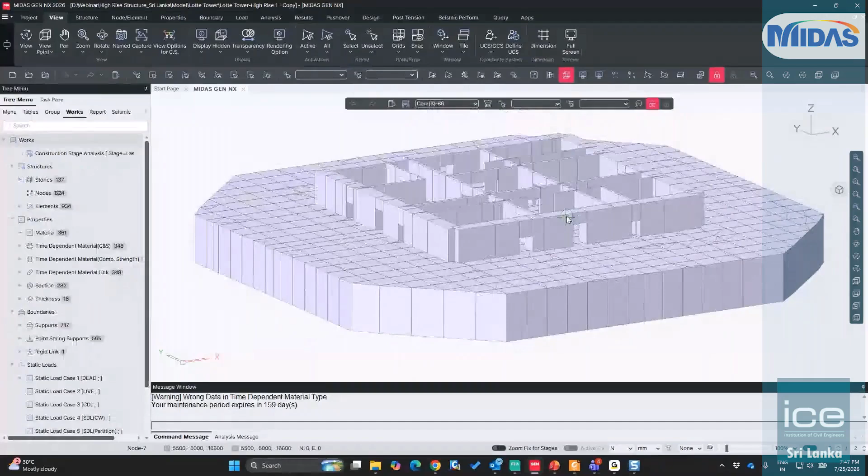So there are a lot of construction stages you can see here. We go to the first one, that is nothing but the foundation, and then the walls are being constructed, then the peripheral column. I'm just changing the construction sequence here. Sequentially, these walls are being generated.

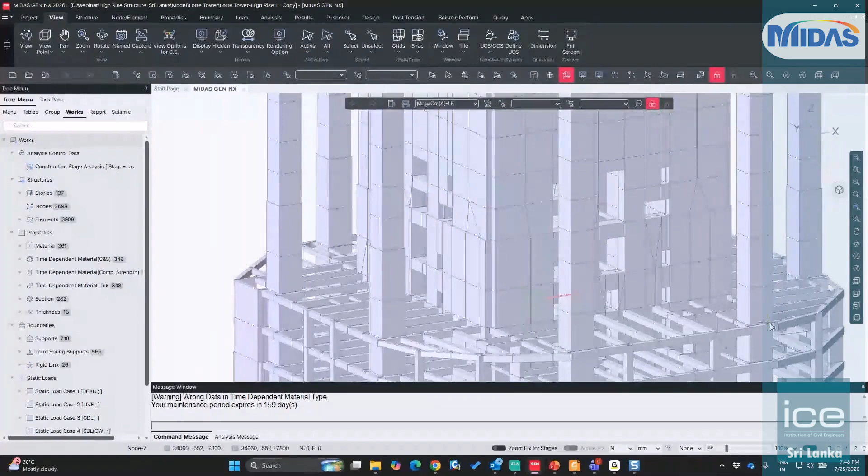Let me show you that. So here in this system, you can see these are my peripheral columns, and then we are connecting the central core with the peripheral column using these beams. So these are termed as the outrigger system.

This is one of the very huge examples, which is actually the prototype of the Lotte Tower Korea, that I am showing you here right now. So here you can see these are my peripheries and these are the central core.

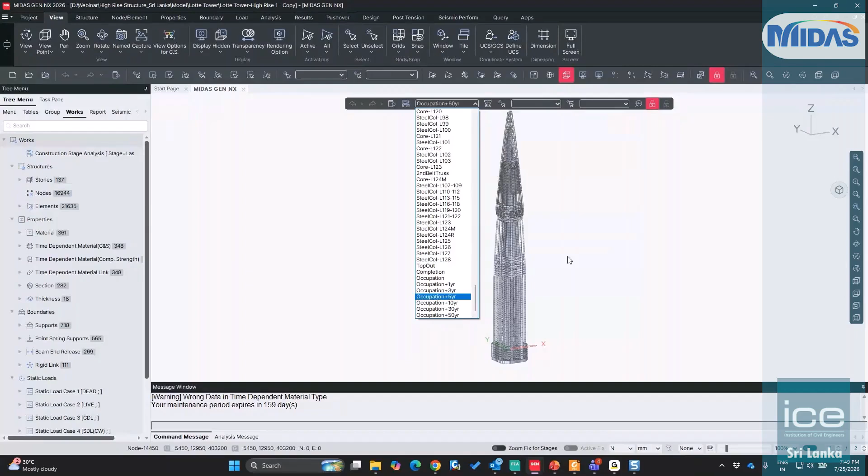And here you can see the construction stage has been arranged in such a way that after 1 year, 3 years, 5 years, 10 years, 30 years, and after 50 years, what are the effects going to be there? So those things we can check.

I will go back to my PPT.

So with this, we have covered the difference between high-rise and low-rise structures, what are the main loadings, what are the main things we need to consider for that: the seismic, the wind load, the time-dependent material properties, column shortening, construction stages, how we can define those stages, how we can consider the duration of the construction stage, and what are the effects of column shortening that we have discussed so far.

So with this, I would like to summarize my presentation here. What we need to remember is that high rise is a stiffness, dynamics, and time problem, not just a strength problem. And wind is usually the governing lateral action, and wherever seismic loads are relevant, we can apply it there.

And the lateral system scales with height. So we have seen that frame to core to dual to tube, and then goes to the bundled tube. And regarding the modeling, we have to consider those modeling things very carefully, where we need to consider the cracked stiffness, construction stage, P-delta, dynamics, and soil.

If we do not consider that, the answer can lead to a wrong answer. And then the column shortening, which is unavoidable, we have to analyze it and compensate, so that slab tilt and those things will not take place.

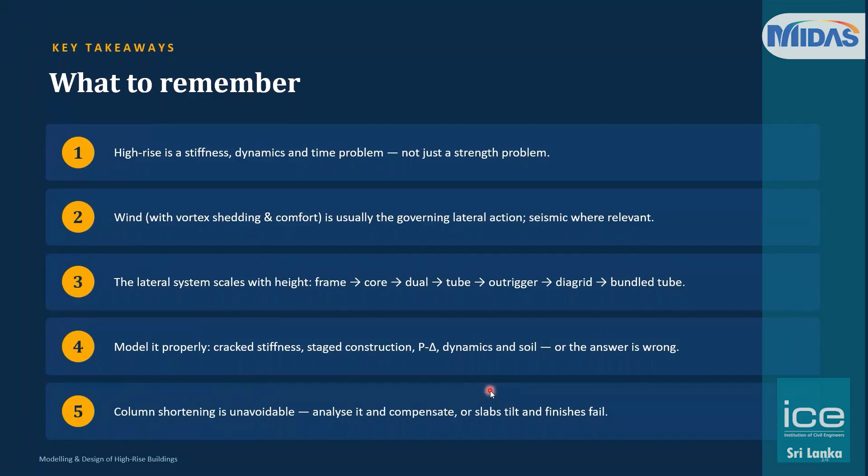So with this, I would like to conclude my session. Now I would like to open the discussion for questions and answers. If you guys have any questions, I would like to discuss those.

I will go, yes sir. The attendees had sent some questions, I'll upload them to the question box. Yes, yes, thank you. I have sent them, sir, hope you can see them. Okay. Let me read that.

Can we design a high-rise building without a transfer floor? In Sri Lanka, many high-rise buildings have transfer beams, not transfer plates. What are the occasions that transfer floors are taken into consideration? If our high-rise structure is unsymmetrical, how do we mitigate the torsion effect using shear walls? Why should we do P-delta analysis, and what does it check?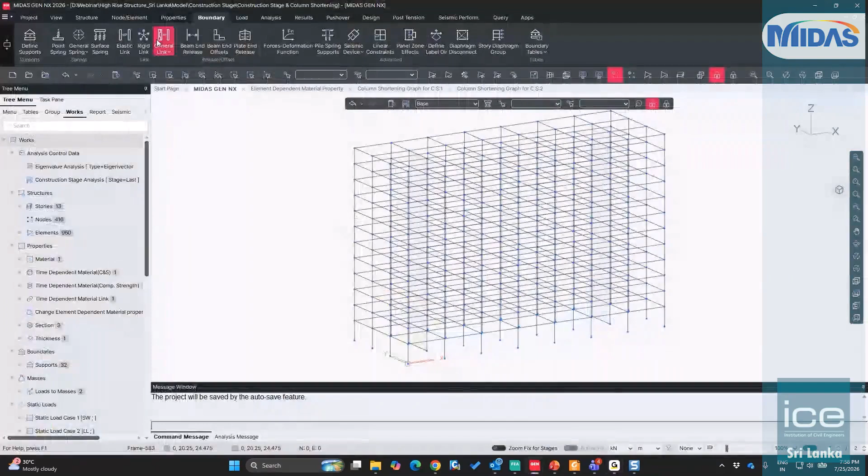We can model those dampers using this particular general link option here.

There are different types. First is the element type, where we have only spring and linear dashpot. Then we go to the force type, and here we can define those dampers using viscoelastic, gap, hook, hysteretic system, and so on. So based on tuned mass dampers or whatever we are using, we can define those properties by using these particular options.

Like if I go to the viscoelastic damper and go to properties, I can define these different parameters: reference velocity, damping exponent, bracing stiffness, damping force, and so on. So using these, let me show you one test, and I'll just take some random values here as well.

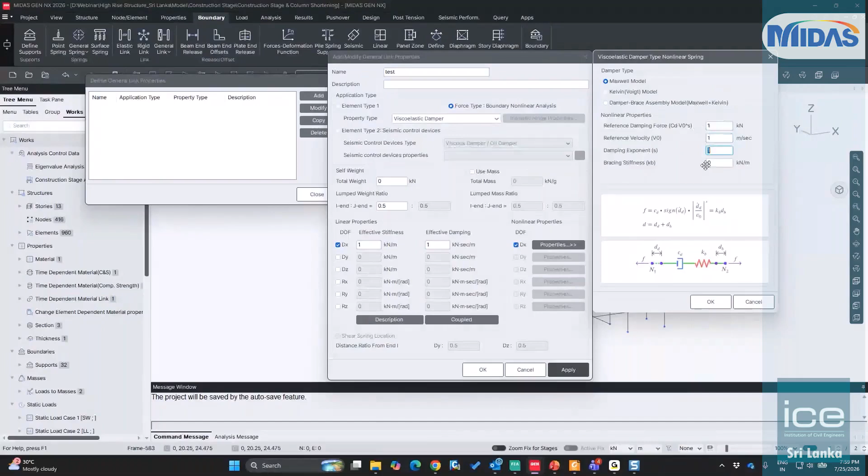Okay, then suppose I want to apply that as a diagonal one. I can go to general link, test, and just provide that as a spring. This is how we can provide that viscoelastic damper or different dampers as a spring. Here you can see that a spring and a damping dashpot kind of thing has been generated. So let me go back.

So when we model that and assign it in our model, when we perform the analysis, the force distributions and the loadings do consider those dampers accordingly. So I hope that answers this particular question about whether MIDAS has any option to analyze the load for tuned or isolated dampers.

Yeah, going to the next one. How to deal with shrinkage effect of the rigid structures in case of shear wall structure with wall and slab monolithically casted. Can you please elaborate this thing? What do you mean by the shrinkage effect? What's the problem you are mentioning here?

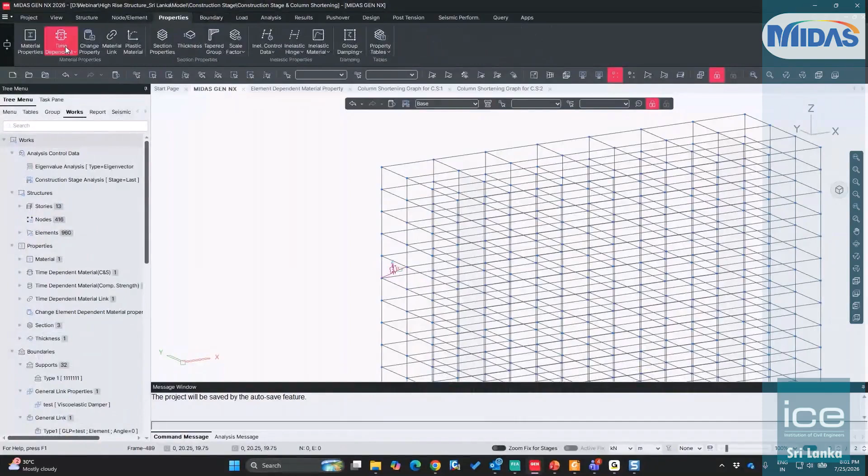So we can just go to creep shrinkage and we can generate two different properties. One is C30/37, and another we can go for defining, suppose, C50.

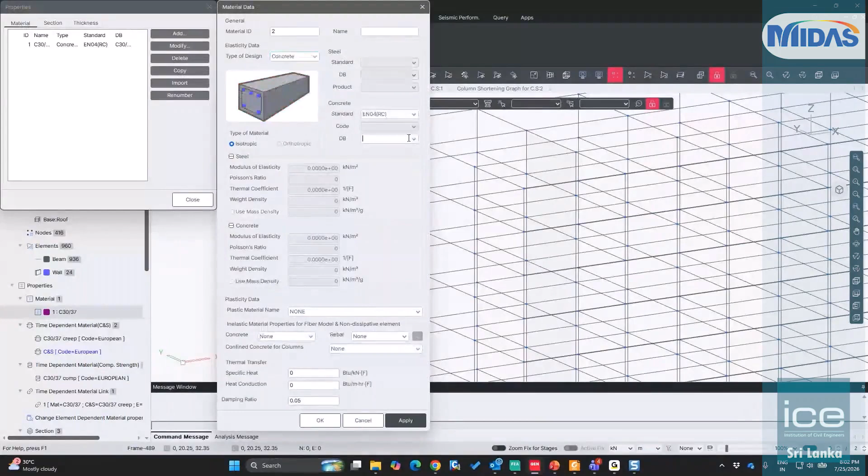So we have two different properties, like a beam and column with two different grades. What we can do is define one more grade here: Concrete 50, 60. So at the time of material assignment, we will find two options. We'll assign C3037 to this one, and we will assign C and S to this particular one. So we have two different grades having two different creep and shrinkage properties, and accordingly, when we run the analysis, it will be considered in the software.

Let me know if there is something else you want to answer, something in this particular question that I haven't answered. Mr. Prageet Nalaka. And yeah. Okay.

The next question is what parameters need to be considered to model on sloping ground. This is from Ravi Kant. When we are going to model on sloping ground, as far as I understand, we are providing the column height changes, or we are providing the foundation like pile foundation where the height of the piles changes, the depth of the pile changes. So we have to model that different length of the piles in that particular model along with the superstructure, and then we have to provide the boundary condition as it changes along the slope, around that particular pile foundation.

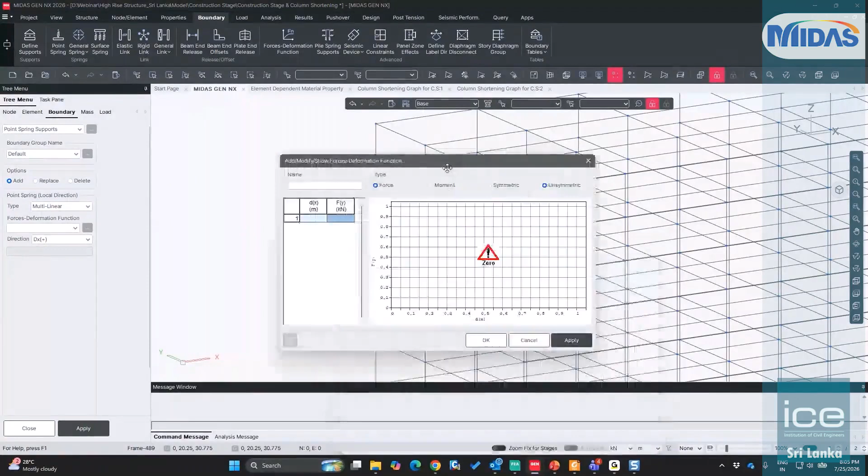Those boundary conditions I have already explained using the point spring or the pile spring option, where we specify the soil behavior either as linear, compression only, tension only, or multilinear, where we specify the force deformation function. The first step is we get it done from the geotechnical department from the stability point of view for that sloping ground. When it is done, they will provide us the PY curve or the stiffness of the soil, so we can provide that using these different options - the stiffness in compression only, or in the multilinear option we can directly provide the PY curve from the geotechnical department - and assign that to the different depths of the pile foundation, so that we can consider the soil structure interaction.

If you are concerned about the stability of the structure on that particular sloping ground, the stability needs to be ensured by the geotechnical team for that particular slope, and then we will get the stiffness of the soil and provide that in the software to perform the analysis.

So again from Mr. Ravikant, how to model a building on sloping ground. The modeling process remains the same, either it is sloping ground or plain ground. Since we are dealing with FEM software, we will be modeling using the coordinates of each and every column and the location of each and every slab. Accordingly, we will create the column locations and provide the slabs and so on.

Only the thing that will change is the height of the foundation that we are providing, either it is an isolated one, or the pile, or the mat with piles - those depths are going to change. So we have to model those depths. For example, let me show you: we can go to node element, extrude, node to line, and define the grade, material, and section. I am creating one more section here.

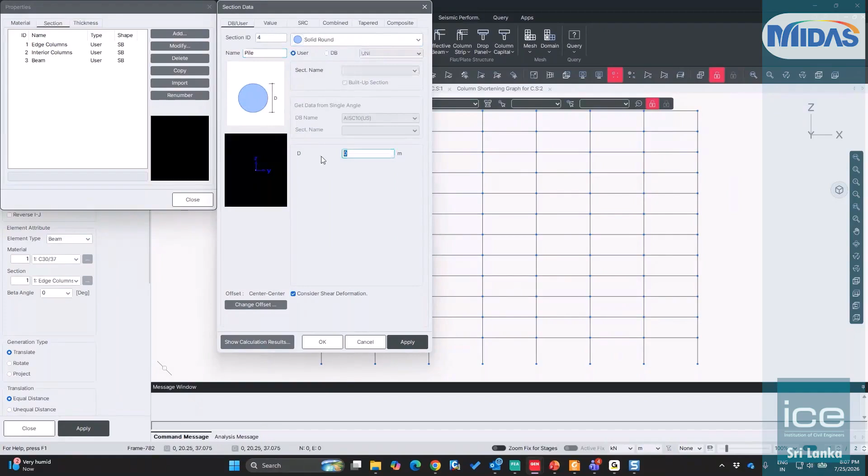Pile of suppose 0.8 meters. I'm going to choose pile, and the distance is -1, 10 number of times - that's my first one of 20 number of times. Apply. This is my first, and then I will go to the second one. Here I will go to 15, apply, and then I will go to 12 for the third one, apply, 10, I will go for the rest of the 10.

This is just for the sake of example - I'm changing the diameter of this particular pile.

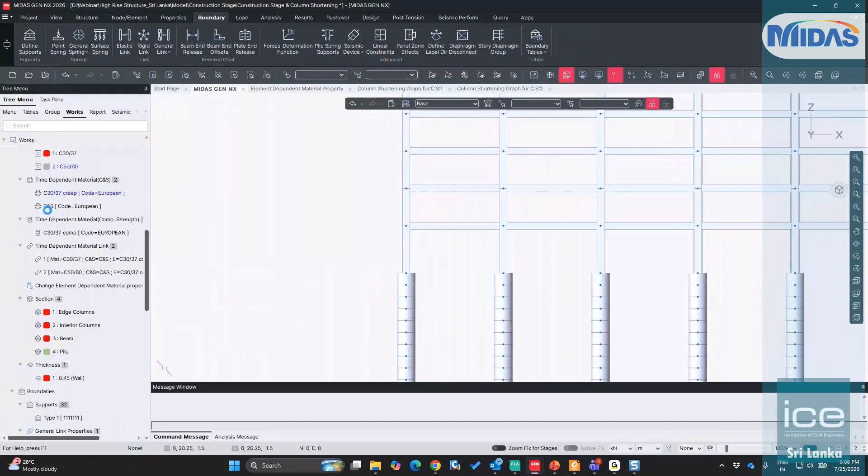So if we are having a sloping ground or something like that, we will be modeling this in this way. The main thing here is the stiffness of the soil that we are going to provide, using this particular boundary option, point spring, and then I'm just providing some random value for the time being. Apply. So to consider the interaction between the piles and the soil, we have to provide the stiffness that we are going to get from the geotechnical team. This is how we can model it - modeling does not change, we can model it with a changing length of the pile, something like that.

Okay, another question is what you mean by outrigger and belt, and bundle tube. I hope I have explained these in further slides in the rest of the slides. If you have further questions, kindly post that here.

When modeling semi-rigid diaphragms, is a thick plate the same as a shell? When going for rigid diaphragm behavior, we do not practically model the slab, either thick or thin, because it is the rigid links connecting the center of mass location to all of the nodes - that is rigid diaphragm behavior. When going for semi-rigid diaphragm, it means we are considering the stiffness of the slab, and if there are any openings or similar, we are considering that flexibility.

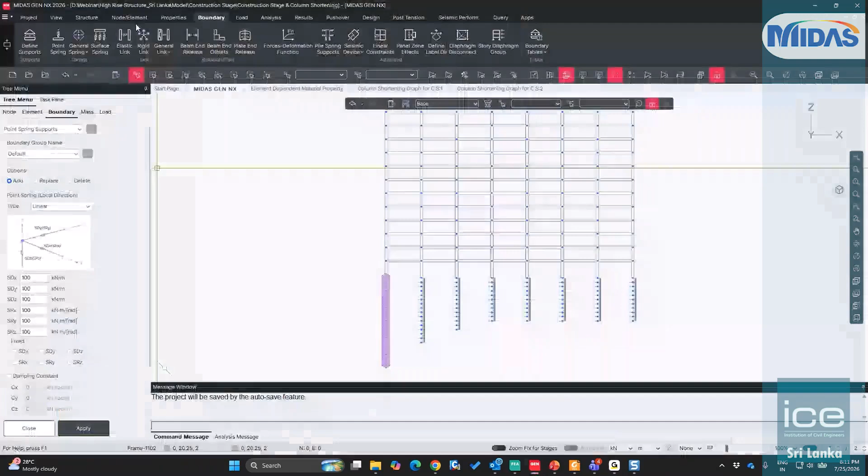We go for this mesh, auto mesh - sorry, define domain and subdomain. Here in the subdomain we have shell, wall, mat, slab options. When we define these different options, accordingly the in-plane and out-of-plane behavior will be considered. If we go for slab only, it will only consider the slab out-of-plane behavior, and shell will consider both in and out, which is actually used for domes and such.

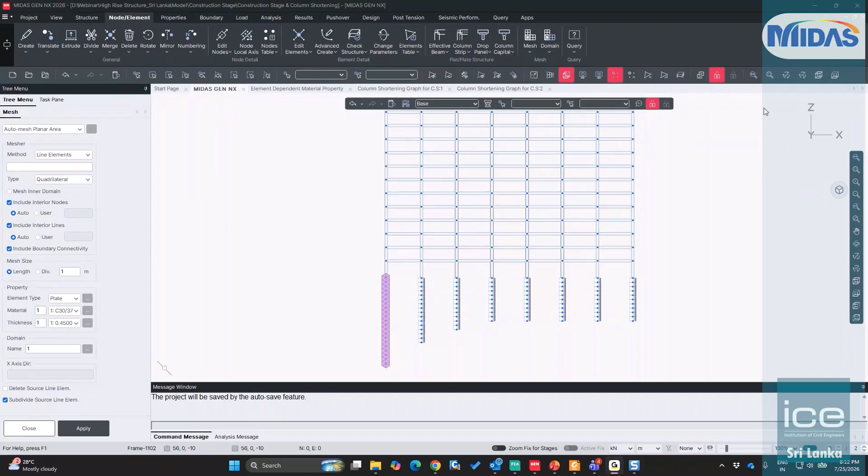We got one more question: how to do time history analysis, from Mr. Ravi Khan. Again for that, in the view of this MIDAS Gen NX, we have these different options available.

First and foremost, we have to specify the global control, whether we want to consider geometric nonlinearity or not - we go for none, large displacement, or P-delta, whatever we want to consider. Then the effect of loads before performing the time history analysis is set up here. Then we go for load cases, add. Here it can either be linear or nonlinear type of time history analysis - modal, direct, transient, and periodic type. When we go for nonlinear, it can be modal, direct, or static. Nonlinear static is nothing but pushover analysis.

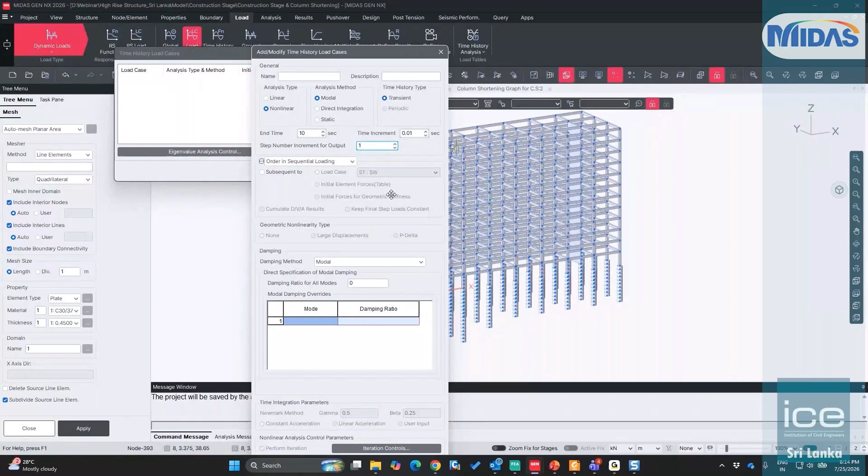Then we define the end time, whatever ground motion we are selecting - when it is ending, that end time we specify here. The increment - suppose I enter 10 seconds, and at each 0.01 second of that 10 seconds we want the results, and step number increment for the output. So at each step, like 0.01, 0.02, 0.03, 0.04 seconds, or by skipping 4 increments it will give us the fifth one. We can set those parameters here, and what is my damping ratio we can specify here. This is the load case we are specifying for the time history analysis.

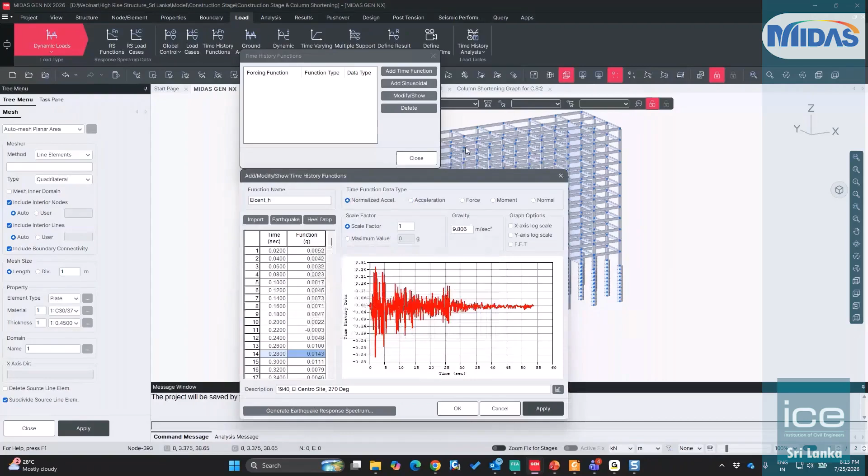Then we go and select the time history function, add time function, earthquake. In the MIDAS database we have many time history cases, ground motions. We can directly use it, and if we have other ground motions we can import it, or enter the data here - just copy from Excel and paste it here. So we can define the time history ground motions here. The first step is global control, second is to define the load case, third is to define the ground motion.

Then we go, and the application of time history has different options - one is ground acceleration. Then we go to ground acceleration, and whatever load cases we have defined, let me just define one.

So this is the test name and the function. Let me define one function: add time history function earthquake. So this is my function, and I'm applying it in the X direction.

Similarly, for the Y direction, apply another function, and in the Z direction, I can apply another function here. Then I will just click on add, and by clicking on that, close.

When we go and check in the works tree, you can see the time history analysis, where we have the load case function and the ground acceleration. When we perform the analysis, we can check for the acceleration value, maximum acceleration value, or at each and every step, like the 0.01 time increment, what forces are generated in our structure, and when the hinges are being formed. So all those things can be checked in the time history analysis results.

There are other ways of applying this time history as well, so these are the four options for the time history thing. Now, when we want to perform the floor vibration, in that case we apply that as a dynamic nodal load. So here in this particular dynamic nodal load...

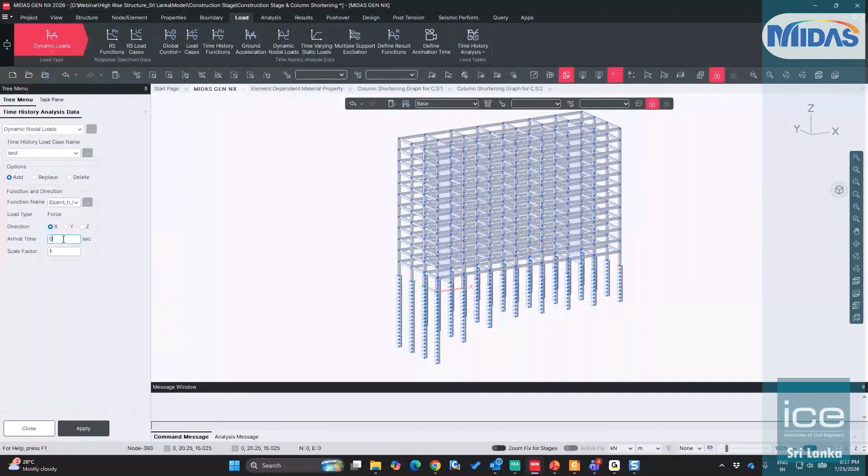Suppose I have modeled some floor, like the plate element, the slab here. Then what we just do is select the nodes where the movement of the human being or the machine or something like that occurs, at what node locations they are being placed. We select those nodes, and then we click on apply. So it is applied at different time intervals.

That particular function first runs at this particular node, and after finishing this, it will go to the second node, third node, and fourth node, and we can check how it is moving in that direction, whatever nodes we are selecting. That is applied as a vertical nodal load, which is why it is called dynamic nodal load options.

But for our case, we can directly go for ground acceleration. We can perform the acceleration using whatever functions that we have created.